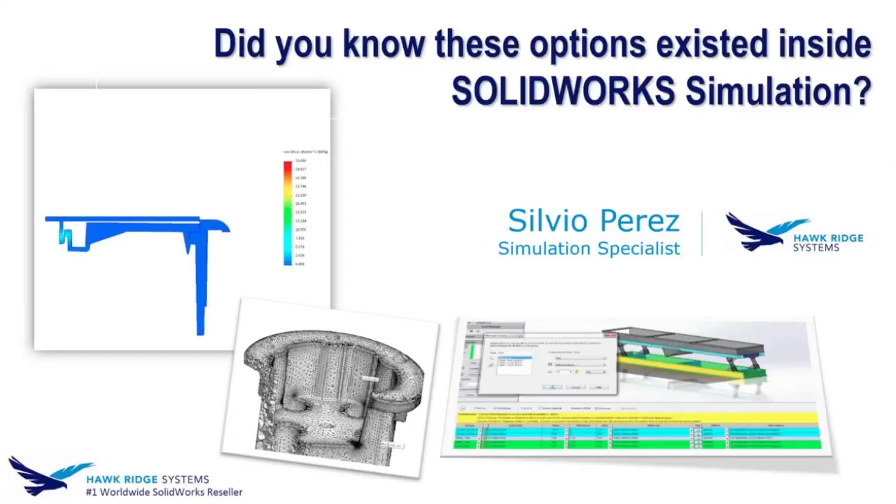But within my training class, there's a lot of things that I try to add in terms of things that may not be included in the traditional manual, tools to allow you to troubleshoot and hopefully make your simulation setup a little bit more efficient. And that's kind of what the goal is today, showing you what's available to you in your software right now, specifically the simulation, to hopefully help you in the process of setting up your problems.

So for today's agenda, it seems like a long list, but they do go by pretty fast. It's somewhat of my top 10 things that a lot of people may not know exist, that are included within at least your simulation standard, the very basic level of simulation, which just includes static analysis for parts and assembly.

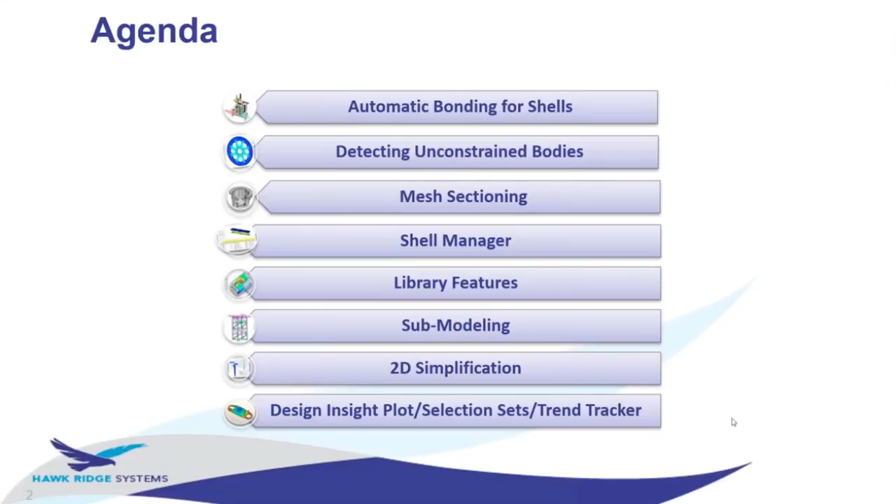So I'm going to kick off the presentation here with automatic bonding for shells. If you work with shell components or shell bodies, a lot of my students have asked me, well, I work a lot with sheet metal, and the benefit of working with sheet metal or even surface modeling is that when you throw that into SOLIDWORKS Simulation, it automatically converts the mesh type into a shell. And that's probably the more recommended type, just because of the thin geometry that we have for that sheet metal.

So that being said, my students or customers who do work with sheet metal usually model in the gap that may be included within the actual model to account for any welding. And that's what we see here in these images on my slide, where we have different scenarios, different orientations, where you actually model in the gap to accommodate the actual weld that may exist in real life.

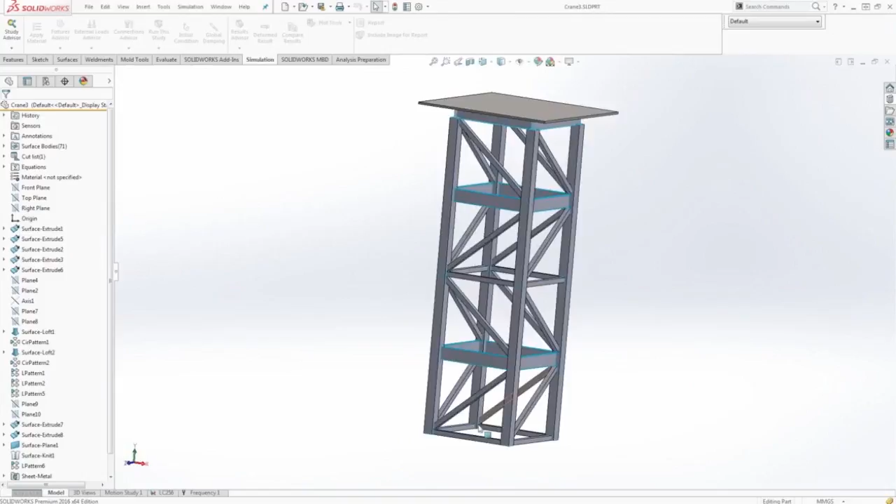So the issue with that is, if I go into SOLIDWORKS here, I'm going to pull up this example of this crane, and the end goal, if we were to manufacture this, is we're going to weld all these beams together, right? And the designer here actually modeled it to accommodate those gaps. I'll just show you here that there is a slight gap in between there. But that presents an issue if we were to try to run a study within simulation.

Why? Because we can define a bonded contact between those gaps, but normally what we recommend is we model it already touching so the global bonded can take effect. And that's what we have here. I already set up the static analysis, and the only set of contacts that we have is this global bonded, right? So what this means is, if I were to run this now,

some of you may already have the experience of seeing what's going to happen, but you see it's running, it's chugging along, you may not know that those gaps exist, and then you get this message saying that the model is unstable. Well, this is expected because we already saw that there are gaps within that body where there are not proper contacts applied, so some of these are kind of floating in space.

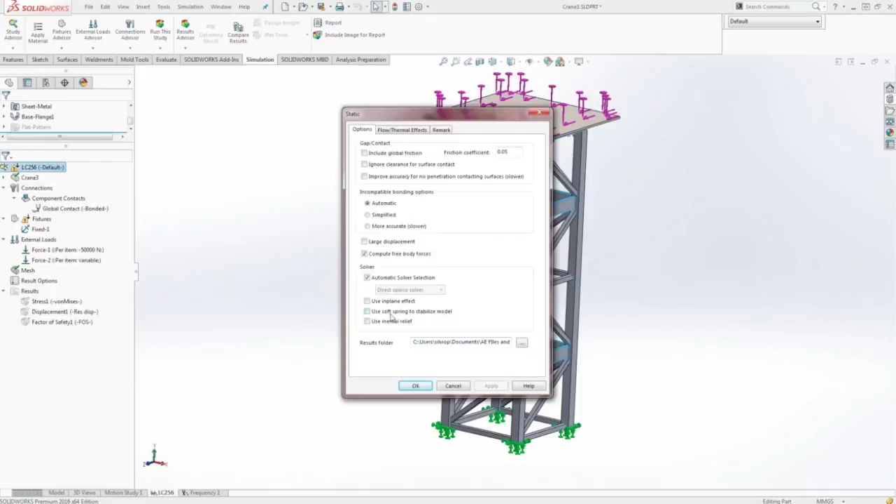So what we would recommend is soft springs, where we can go into the study properties and specify these soft springs to stabilize the model, run it under that condition, and then view our displacement results and see what component is actually flying off. But the downside is that sometimes it doesn't always work. Sometimes you run it under that mode and it still says that the model is unstable, or something is not properly defined. So what do you do?

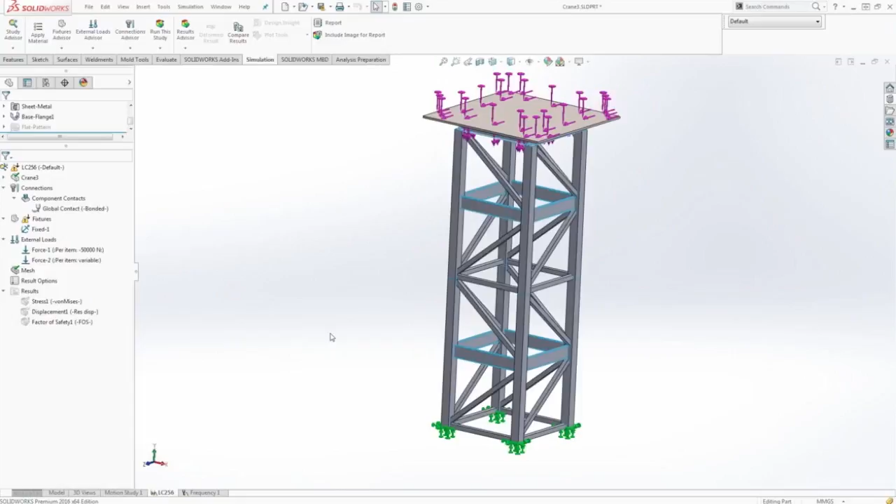Well, you can do a visual inspection, like we did. I already knew this, but it was very difficult for me to see that these actually had a gap. So you can do a visual inspection, but sometimes that doesn't work. So one thing they introduced within Simulation 2013 was this contact visualization plot. If you right-click on your connections, you have that option here. And this is a nice tool because we can run a check for the entire assembly. In this case, it's a multi-body part.

Or we can specify specific members and see what contacts are actually available within that body. I want to run it for the entire part, and you see when it calculates here, it actually generates a list and a color code as far as what contacts are available.

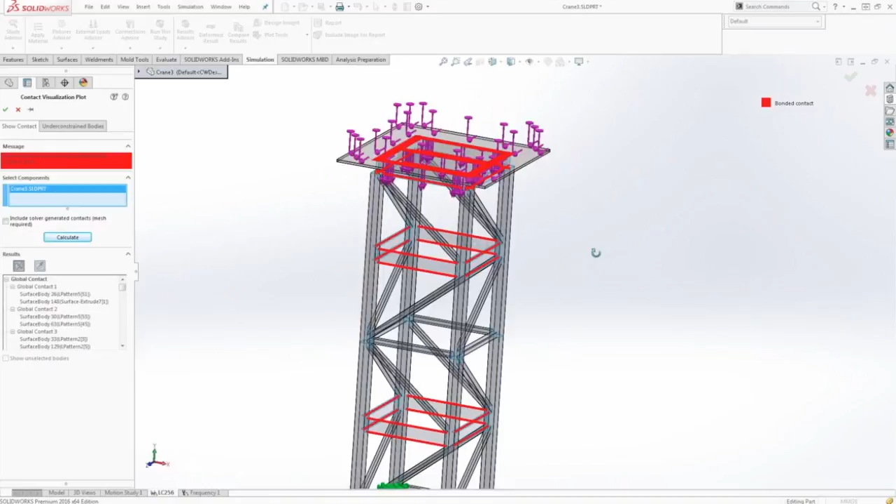So if we were a little bit more familiar with the design, we would actually clearly see that the only bonded contacts that are available are the ones where it's contacting, creating that T-shaped beam. And there's actually no contacts defined where the beam meets these beam fixtures here. So we can already see with this visualization plot that there may be a problem there, which is why I'm getting a model unstable issue.

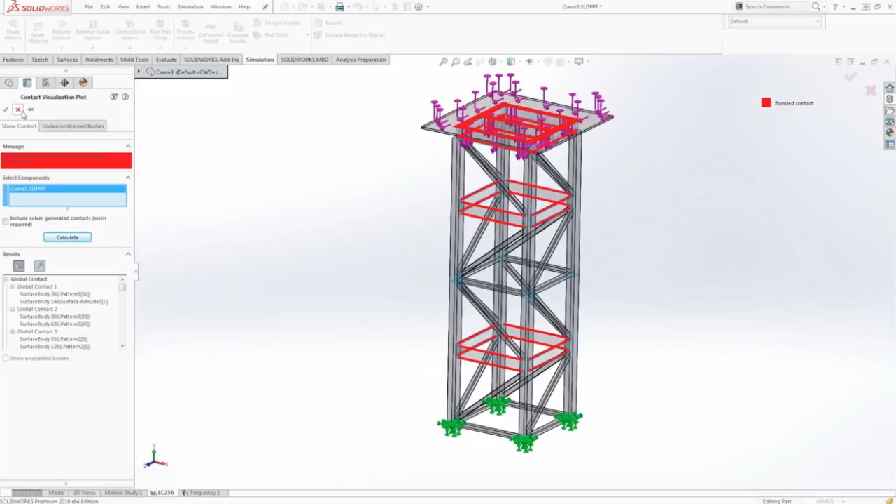Well, so that's more of an aside of what we can do as far as tools. But one of the things that a lot of people may not be aware of, because it's a new feature that was provided to us in 2016. So within that contact visualization plot, we have this unrestrained or unconstrained bodies tab. You can access it on its own as well by right-clicking on connections, and you see that we have that option as well. It takes you to that same menu, except it pre-selects that tab.

And it's very easy to use. All we need to do is just hit calculate, and it runs a check. It's almost running the analysis internally to see what bodies are actually flying off. So after it completes the study, you see that it finished, and it actually generates the list on this unconstrained bodies list. And this is very powerful because it actually tells us what bodies are unconstrained.

So I can select on body 1, and it visually highlights the member in which the contacts have not been properly defined. Pretty much that member there is floating in free space. How do we know that? Because we see what directions they're able to move. There are 3 translation and 3 rotational, meaning that all 6 degrees of freedom are available to move in those specific directions, and it clearly tells me that in that animation after I select that direction.

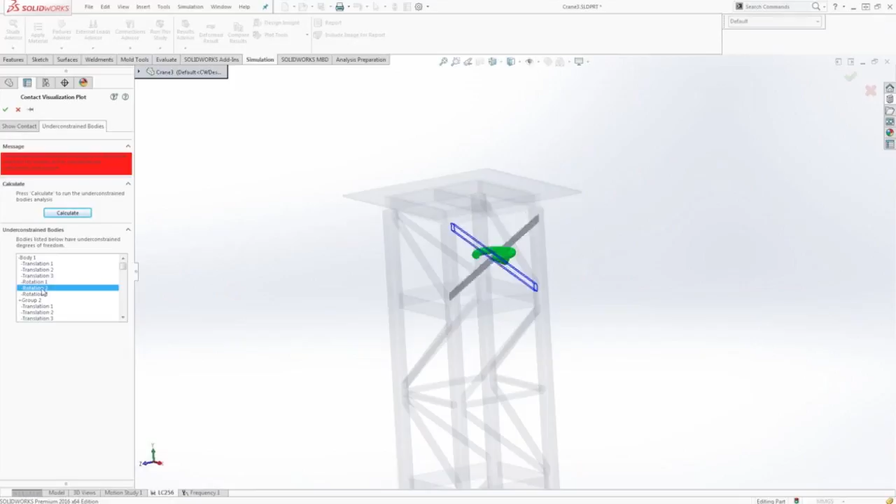So a very powerful tool that speeds up the process of troubleshooting that error message of model unstable or something is not properly constrained. You can run this unconstrained bodies check, and then it'll pinpoint exactly what bodies are not properly constrained. Again, one thing to note is that it's only available to us in 2016. So if you're in an older version, you have to do the traditional way, but it's something to look forward to if you are considering upgrading to 2016 now.

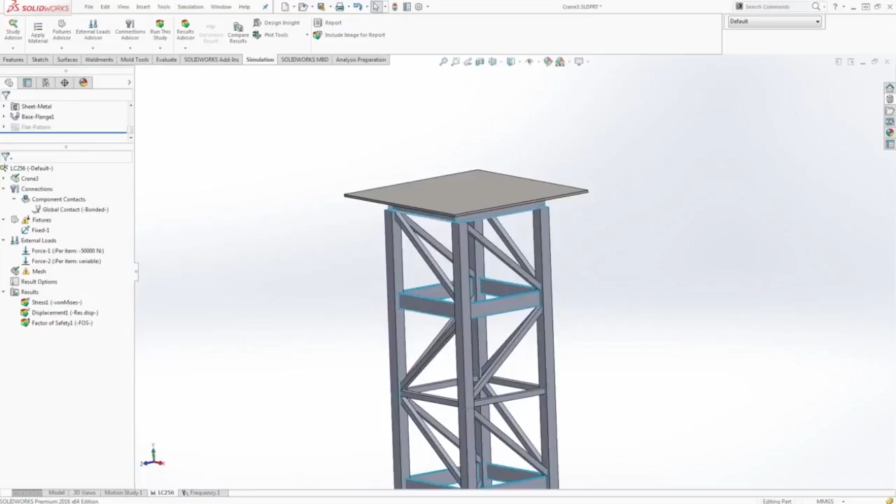So let's go back here. And so, yeah, automatic bonding for shells, a very powerful tool to help you speed up the process of troubleshooting any bodies flying off. So what else we have here? The other thing that we have is, or what I just went over, sorry, is the detecting unconstrained bodies.

And I kind of jumped the gun here a little bit, but what I was getting at here is, how do we accommodate the overall gap size here? What we can do is edit the definition of that global bonded, and I can go into the non-touching face option that's also new to 2016. So when you edit the definition of your global contact which is set to bonded, you can enable that and specify what the minimum gap thickness is as far as that clearance.

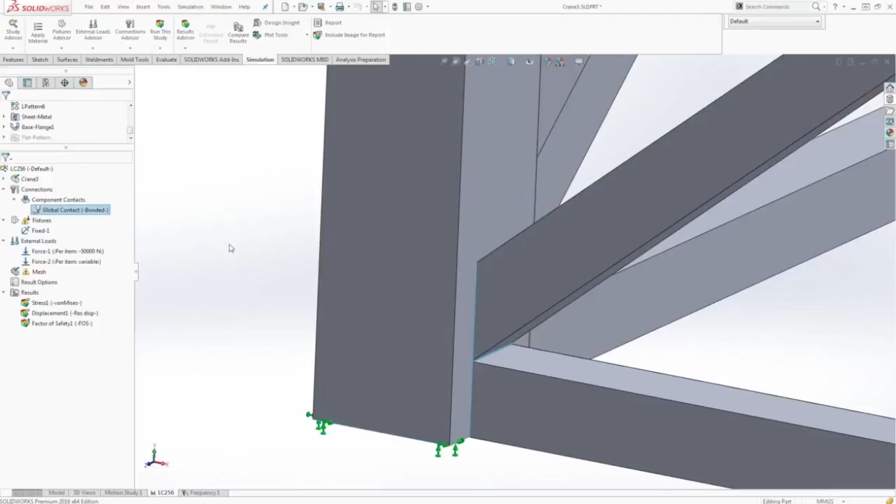So it can say, well, if I am already accommodating for that gap size of 2 millimeters or less, automatically define that as a bonded contact. And all I need to do is enable that option and specify what that limit is. And when I hit OK, you see that I didn't change anything to the model, where before it was giving me unconstrained bodies. I can run this analysis here, and you will see that the study eventually should run to completion.

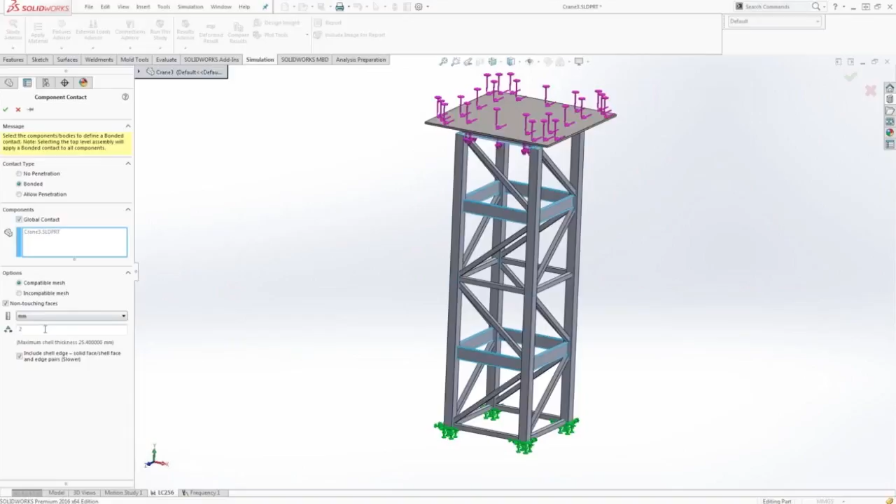So this now accommodates those special cases where you're working in sheet metal or in a beam structure similar to this, and you're modeling in a way to account for the actual gap size for the potential weld that's going to be there in the real life scenario. So a very simple option to enable. Just go into your global contact, set it to bonded, specify your non-touching face gap clearance, and then we can accommodate that without having to individually define those contacts for each bead. So again, saving you a lot of time.

So I apologize for that. I kind of jumped the gun there just because it's a really nice tool here.

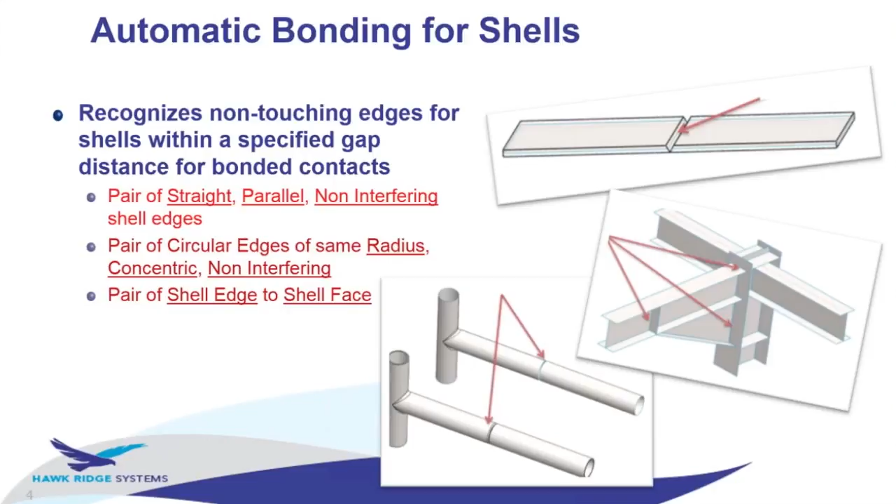As far as automatic bonding for shells, to recap, we can do this for pretty much shell components in these specific orientations. Unconstrained bodies, again to recap, is we can list out the bodies that are unconstrained and animate which bodies, and what direction they're able to move.

The caveat about this, though, is that it is only available for a static study. So if you're running a more elaborate, nonlinear type of scenario and you're still getting some unconstrained body issue, unfortunately we don't have that tool available. So we'll have to do the traditional ways of troubleshooting that issue.

What else do we have here? Mesh sectioning. This is another thing they added within 2016 that can help you really check the quality of your mesh. As it stands now, what we've been able to do is run our analysis like normal and show the mesh overlaid on top of the stress results. But we've always only been able to do that as far as the overall exterior faces of the model.

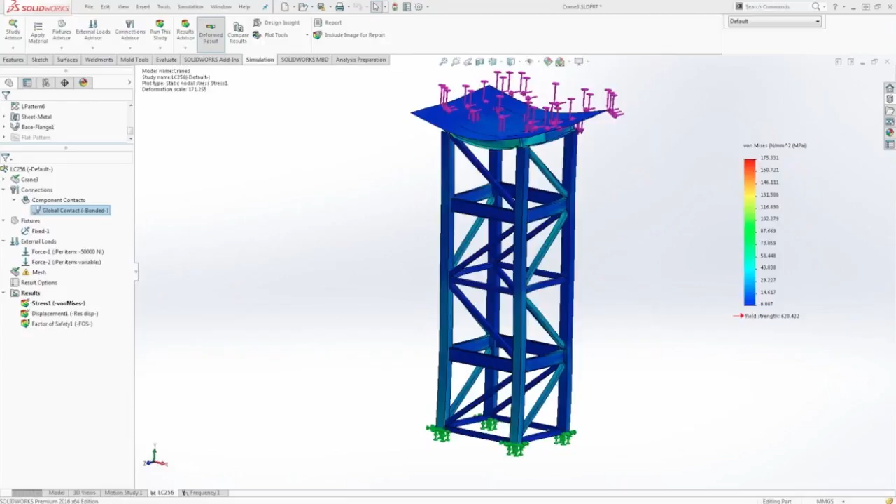So let's take a look at an example here where I have this part and I already predefined the analysis, and I can view my stress results here, and that's fine. We can review them like normal, but eventually once the stress plot actually loads up, based on how I loaded it, I should expect to see some stresses in these fillet areas.

Typically when you're running a structural analysis and you're seeing these hot spots, these stress concentrations in these areas, you want to make sure those stress concentrations are actual true values and not some weird singularity. So what do you do? You end up throwing more elements within that region and see if those stress results converge.

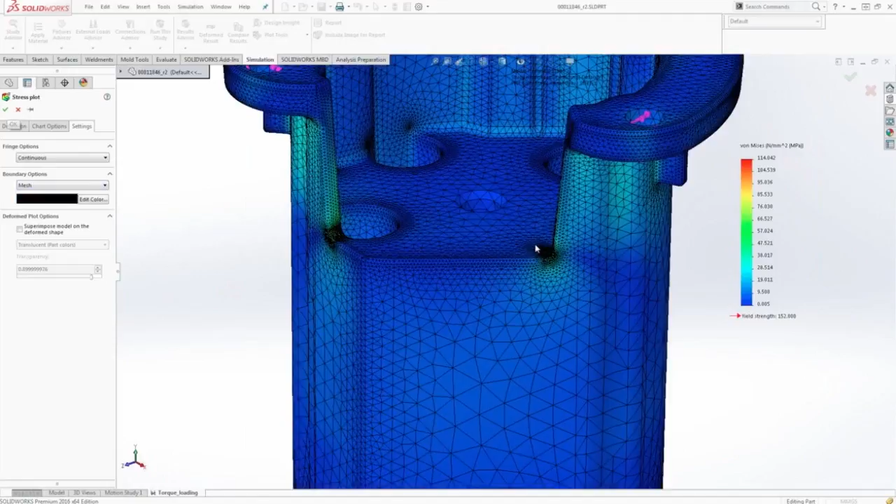Well, you may want to know what the mesh quality is around those specific stress spots. So what you've always been able to do is right-click on your stress plot, go to settings, and under these boundary options, overlay the mesh on that body like so. And you see I had already applied a mesh control within that fillet, which is great, so this tells me I actually refined the mesh in these critical areas, these areas of concern.

But what's happening if I were to do a section view? What's going on, how good is the element quality if I were to do some type of cut section there? Well, we haven't been able to do that until now in 2016.

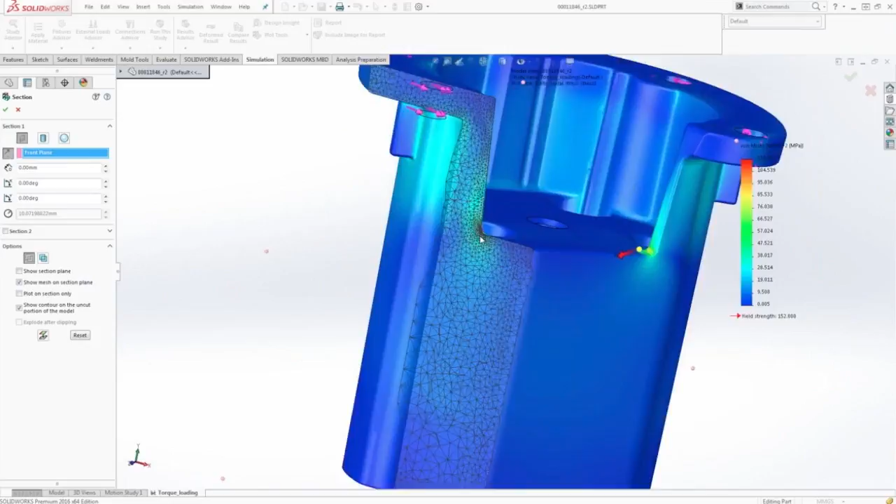So one thing we can do is first specify the section clipping here, and very similar to what you've always been able to do, choose whatever plane you want to cut the model in. I can choose that plane there. But now what we have available to us is show mesh on section plane. So I can select that option, and now I can view what the mesh quality is on that cut section.

This is a very powerful tool, because the whole point of viewing a section clipping view as far as the stress plot is you want to see what the magnitude of that stress is in this particular area. So you want to make sure the overall mesh elements are refined enough where that magnitude is. And you see in this outer section here, we have a pretty good quality mesh due to that mesh control I created. So we now have a better view, a better outlook, and a better understanding of how good this mesh quality is, this mesh control that we applied on this specific region.

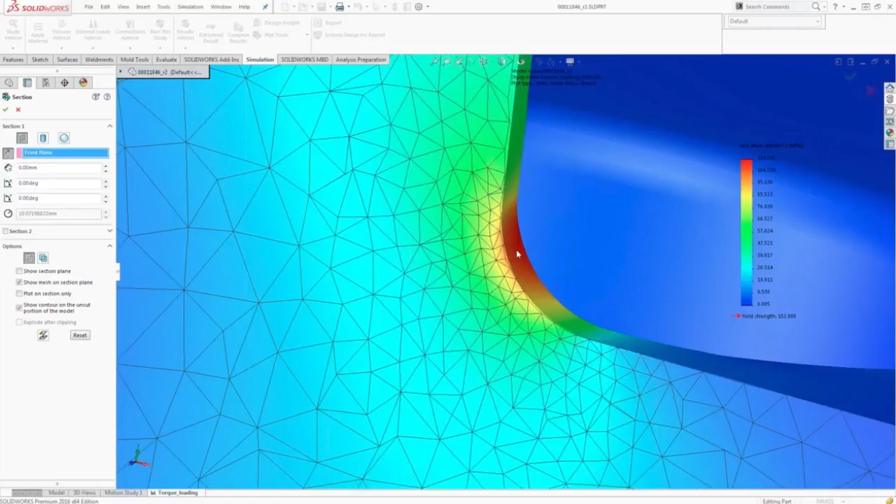The other thing we can do related to mesh sectioning is we've always been able to create a mesh quality plot by right-clicking on mesh, going to create mesh plot, and one of the views we can output is the overall mesh, and that's what's going to show us the overall mesh quality there. You see where I'm getting at here, but let me create a brand new mesh quality plot, just to run through the motions here.

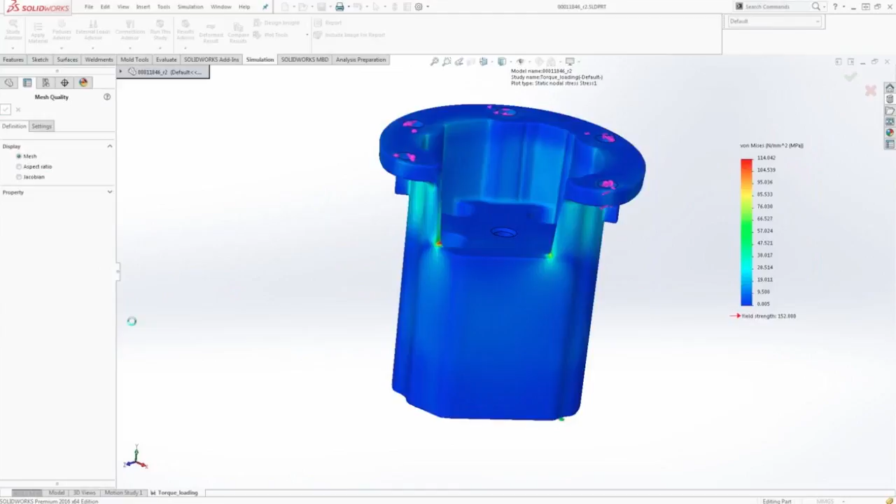Right click on the mesh and create a mesh plot. I can view the mesh there, and it generates that quality plot. What it does for this specific setting I chose is overlay the mesh on the body.

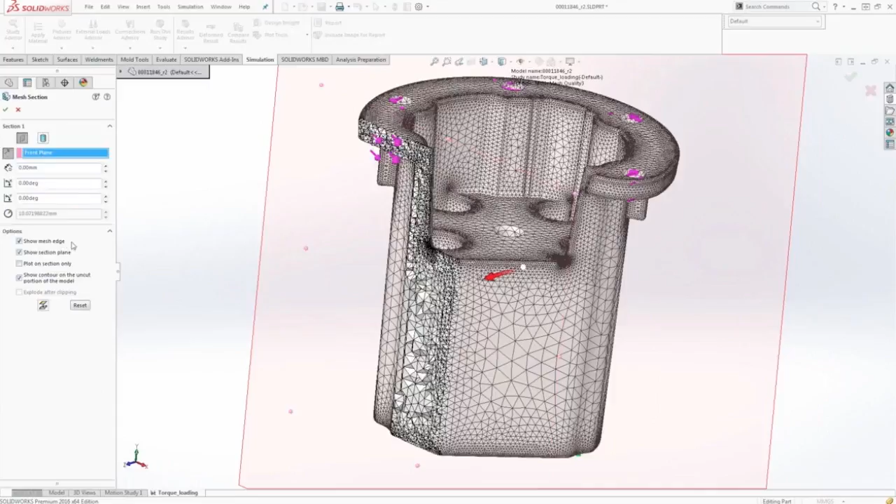But now I can right click and choose the option to do mesh sectioning. Similar to section clipping, I can choose the plane in which I want to cut the body, but now I have the option to enable the actual overall mesh, so we get a 3D view of what the quality of that mesh is, as opposed to just overlaying that cross section.

So we now get a 3D representation of that mesh quality as well, just to show you how good that mesh is in those critical areas of concern. This isn't very apparent, but hopefully you find it useful in specifying and refining the mesh in those critical areas.

One thing to note is that this is only available with 2016 moving forward. So to recap our presentation: we can overlay the mesh on a section clipping, and we can view the 3D mesh elements on that mesh quality plot like we saw in those images.

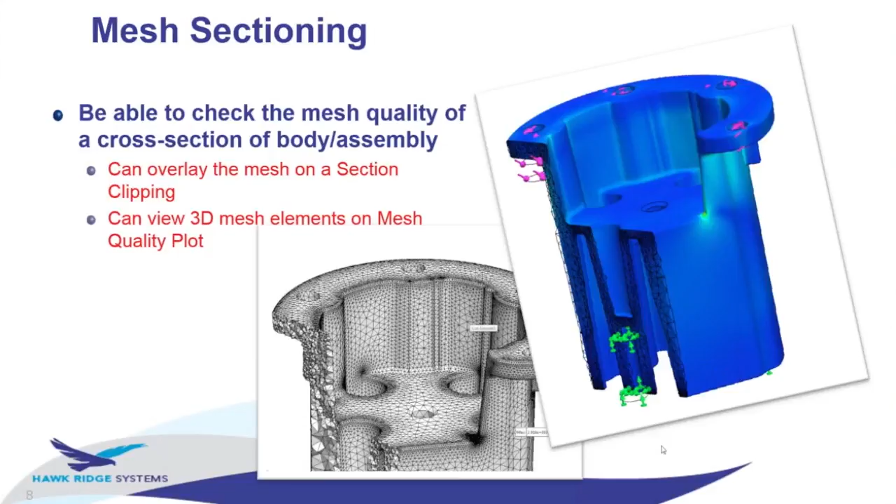Now another useful thing that a lot of people may not be aware of, or if they are, they don't use it much, is Shell Manager, which was presented to us in SOLIDWORKS 2016. It improves the workflow of how we define shells, even more so in a large structure.

One of the tedious processes of defining a shell, if you're converting a solid to a shell with a body or an assembly that has a lot of parts, is you'd have to go individually to each body and specify or convert that solid to a shell element, specify the thickness, change the offsets, and things like that.

But what if you wanted to make a design change and change the thickness of that shell? You'd have to go back to each one and define it again, putting you more at risk of missing a body or accidentally changing something you didn't mean to. Shell Manager helps with that.

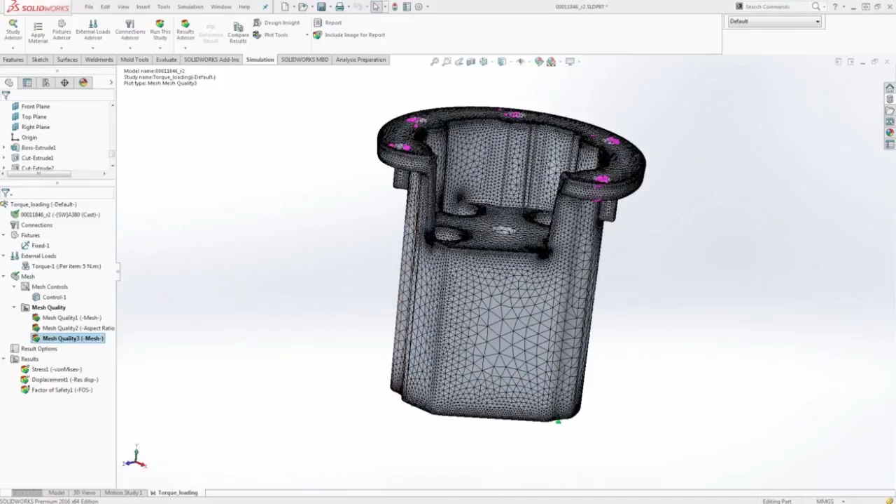You may be working with a lot of shells yourself, where if you model it in sheet metal surfacing, it'll take in that geometry and automatically convert it to a shell. But sometimes you model as normal 3D features, and you need to convert them manually.

To recap what we need to do, all these are shells already, but I needed to convert them. I would need to go to each body and edit the definition of that shell, specifying the faces in which the shell is applied, the thickness, and the overall offset, but doing that on a one-by-one basis.

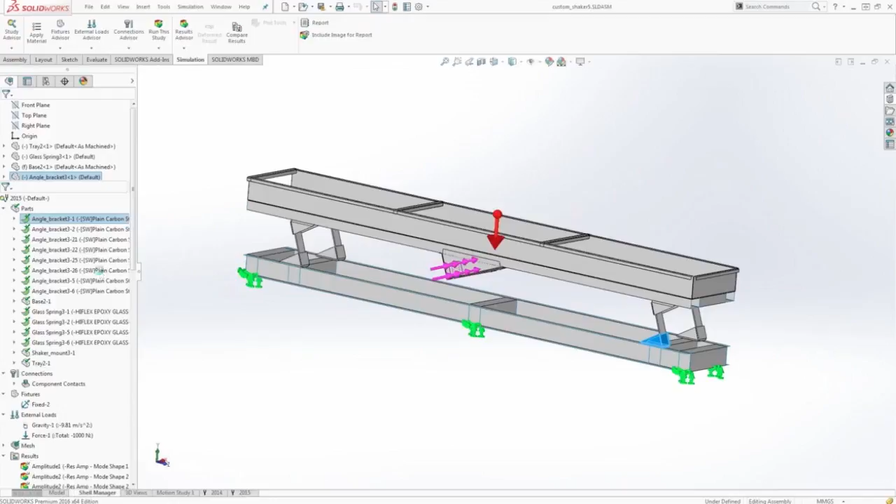So what we have available here is, when we right-click on a component, you may have noticed we have a Shell Manager option. When I open that, we get introduced to this interface.

What's nice about Shell Manager is even though we selected that part as the initial component, we can pin this menu up and create shell definitions on the fly, similar to what you've probably been doing. We have the traditional menu to select faces, define whether we want thin or thick, and define what that face is going to be used as a reference.

Is it going to be the top surface or the mid surface? We can then define the material and the overall shell thickness, generating those shells on the fly within Shell Manager. But the beauty of Shell Manager, in my opinion, doesn't really come in until we define these groupings.

It's optional because we can define those shells on the fly, one by one, like we always have. But I can create a new shell group, and it'll take me to this menu here.

It'll take me to this menu here. You see that what I can do is define my own shell group. I've already created a few of them here where I can call this base rails, and you notice I can define the properties associated to that group. So I can say I want it to be a thin shell.

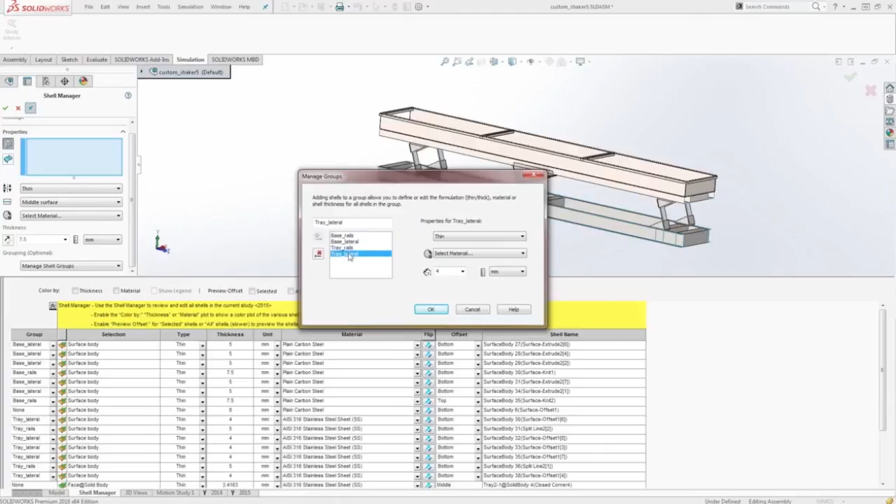I'm not going to specify a material for this for now. I want that overall base rail group to be 7.5 millimeters. The other thing I can do here is add another group, and I can change this to 5 millimeters, and so on. So you see I have different groups to accommodate the different thicknesses of my overall geometry.

So let me go ahead and cancel this. The beauty of this is that when you go into the shell manager, it lists out all the bodies that you may want to convert to a shell, or that you've already converted, and pretty much the properties you want to change. In this case, I already did that work, I already converted the solids to a shell. But now, because it's such a large structure, what if I wanted to change a parameter, like the overall thickness, or define an actual material for that?

Well, you see all those bodies are listed within the shell manager, and they're associated to a specific group. So I specify that this specific shell body that highlights in the graphics area, I want to link that to the base lateral. And then I did that for all the other ones as well.

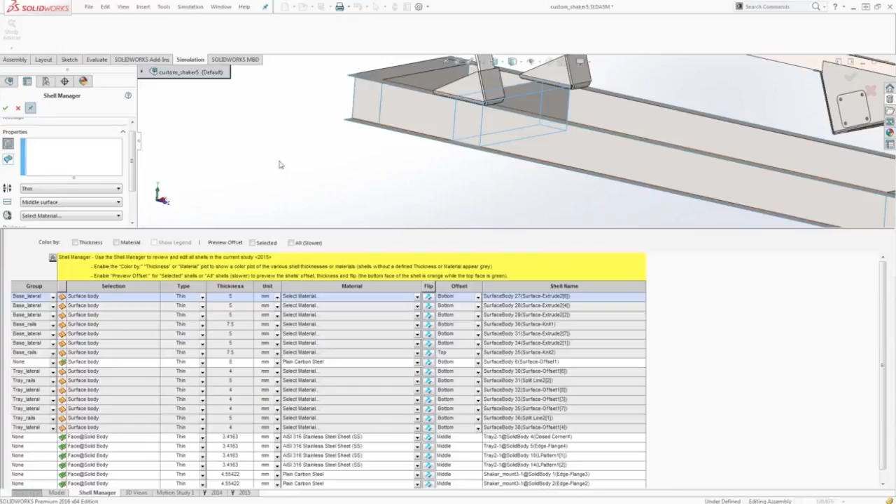So the beauty of this is that, what if I made a mistake, or I just want to do a design change, and I really wanted to make all those base lateral components 6 millimeters? What I can do in the actual table is override that from 5 millimeters to 6 millimeters, but notice it didn't change it for that individual one. It's linked to that specific group, so all the other ones that have that base lateral grouping change that thickness as well. So now I no longer have to go to those individual bodies and edit the definition and change it to 6 millimeters.

I can do it just once, and it propagates to all the other components associated to that same group. I can do that as well by specifying a material. What if for that group lateral I want to specify alloy steel or whatever it is? I can hit apply on that. You see, I don't have to do it for each individual one, it applies it for all the ones that are base lateral.

So it's a convenient way for you to edit or add any property to any shell you want to define on the fly. We can even turn on these filters here in terms of the overall thickness. This is really nice too, because in this case we do have a lot of shells or surface bodies, and you want to make sure all the faces are consistent to a specific grouping.

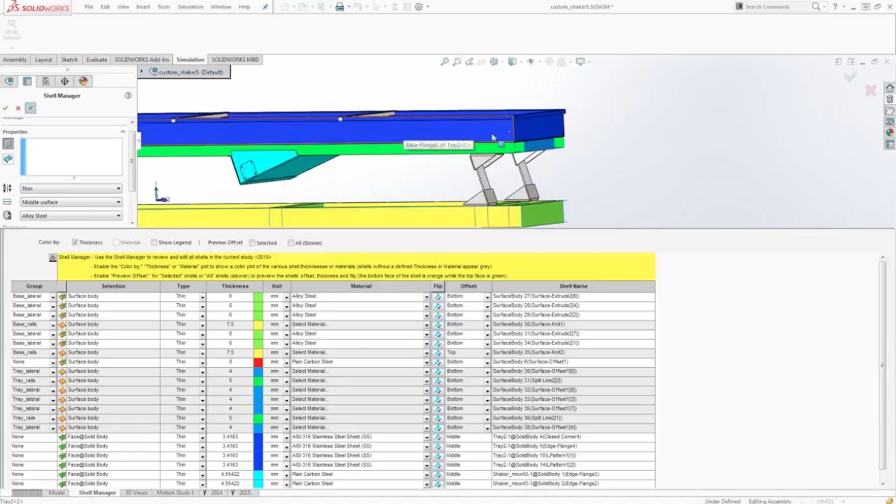So let's say for that blue face, for whatever reason this face was a green face or didn't have a color, well, now I know I either missed that face to define it as a shell, or I accidentally defined it as another grouping. I can easily go into that group, it highlights it in my table, and I can link it to an actual grouping and change that on the fly.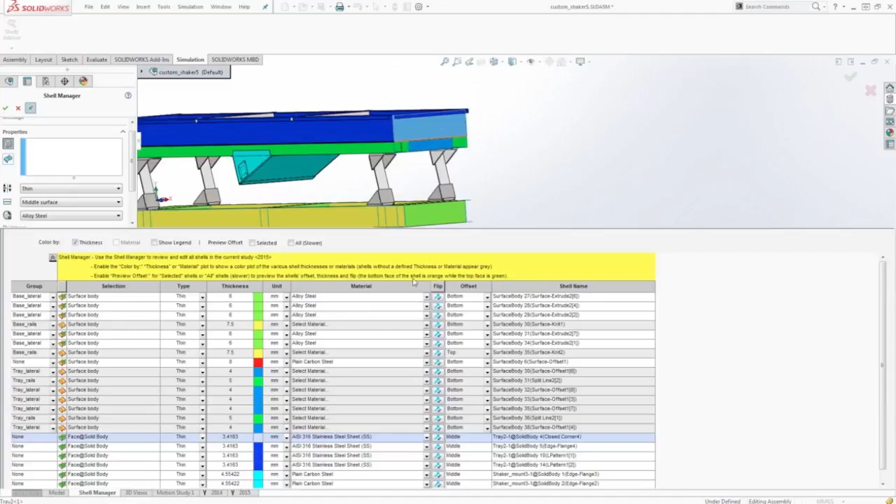So it really becomes useful when we have a large assembly or a large structure that has a lot of shells. We can utilize the shell manager to change different inputs at once, pretty much just change one property where it propagates to the other bodies very fast and efficiently. So hopefully you find that useful, and hopefully it's something that if you didn't know, you can utilize now and play around with it a little bit more.

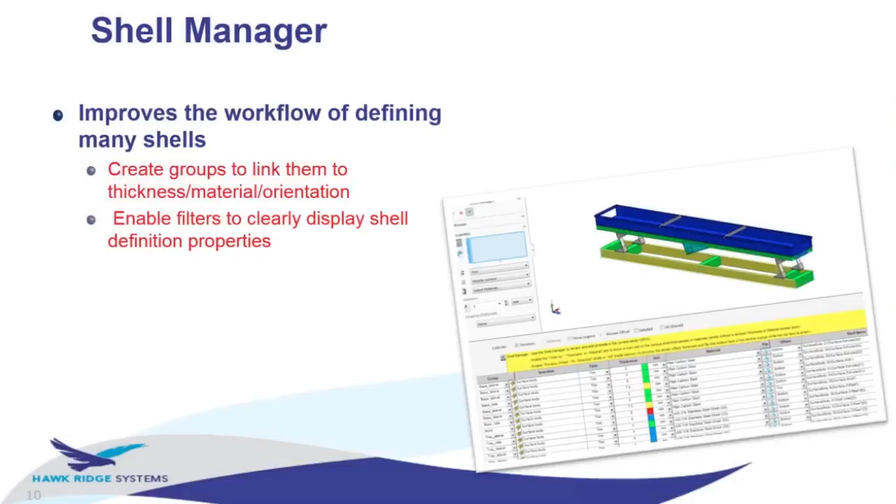So that's the shell manager. The next thing I want to show you that a lot of people may not know exists is library features. You may utilize library features in your normal modeling, where it adds a convenience factor of a certain functionality, a certain workflow that you constantly use to design your part.

Why do that for each part one by one? Why not save that workflow and then apply it for your future components? Well, it works the same way inside simulation. For any fixture or load you define with their proper inputs—a numeric value for your load, a certain direction for your fixtures—you can save that and apply it for future components. Let me open up another example here.

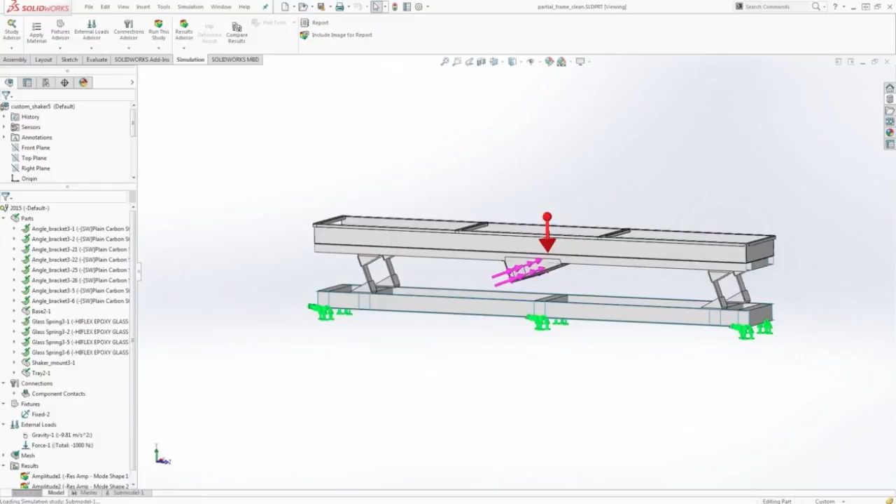Let's say I wanted to define fixtures and loads, and I pretty much did that already. So in this case I defined several different loads. For this specific load, if I edit the definition, I wanted to apply a 250 Newton load, and the same thing for that 500 load as well. And you see I have a specific fixture, in this case a fixed geometry.

For this example it may not seem too useful, but it becomes a lot more useful when you have a larger scale problem. So what you can do, for example, is for that specific load, I can right-click on it and say Add to Library. And then it brings up this library here, and what you're looking at, this design library, is associated with your actual design library interface on the right-hand side.

You may have never noticed, but you've always had an analysis library here, pre-programmed within a fresh install, with some example files of static analysis—there's already some load fixtures you can apply to your bodies. But if I were to save a unique force, let's say, again right-click on that force and say Add to Library, I want to save this under my overall analysis library parent folder, and I can hit OK.

And when I go to my design library here, you see that I have that overall force. I've done it a couple times, but this one's called Force 3—that's the one I just generated.

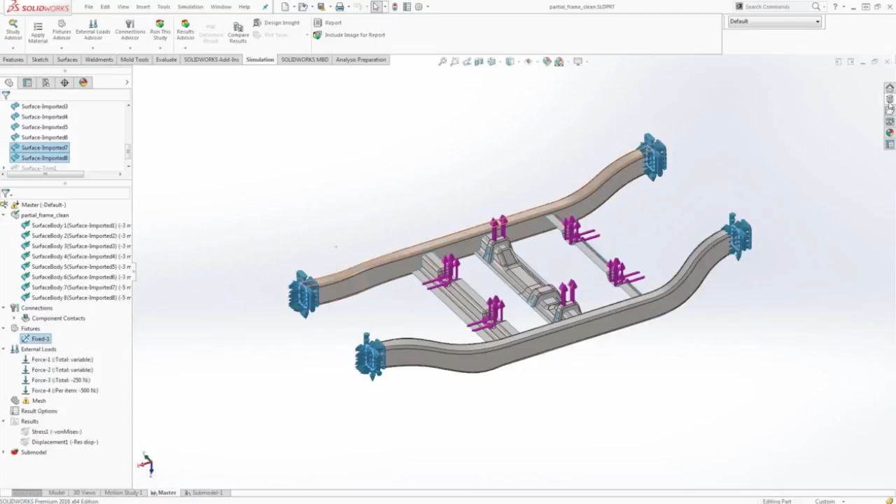I created the same workflow here when I created the fixture—I right-clicked, said Add to Library, and saved it under the design library. I can throw that into the graphics area, and you see I even saved all the edges of that fixture. So I can create all those fixtures with just a quick drag and drop and then redefine them automatically.

Nice little convenience factor that's always existed, very similar to our design process as well. So going back to the overall presentation, all you have to do to add to a library is right-click on that sim feature and save it in whatever folder structure you want. Then we can apply that for future models—that's what you're looking at in the images, being able to throw it into the graphics area and make the proper selections within the actual unique model.

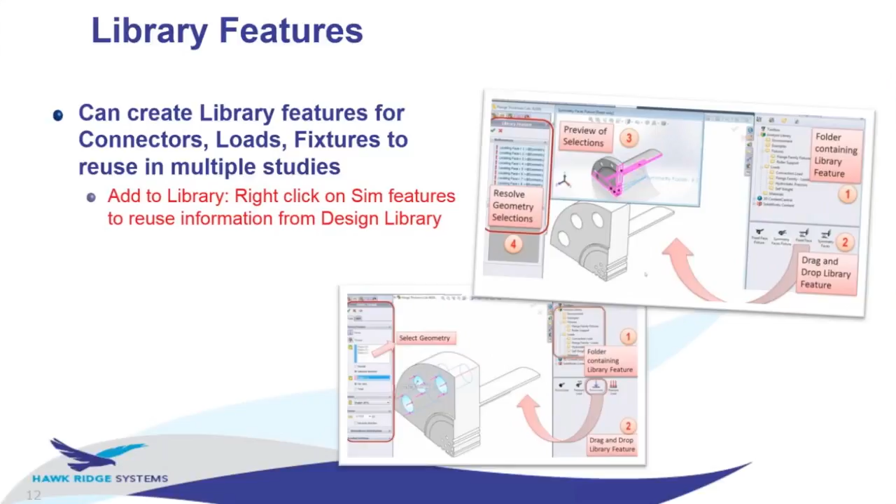So I just got a question here—good question. Can I save certain plots within the model? I want to say I can take a look at this right now, but those are going to be unique to the actual interface, so it's just embedded in the normal result file. You see here when I right-click, there really is no option to save it into the library. So unfortunately, when it comes to those results, because they're unique to that specific body, we can't use that. Hopefully that answers your question—if not, feel free to send a follow-up question as well.

But this leads me into my other "did you know this existed" topic, which is submodeling. It's something that they introduced in 2016 as far as its capability, but it's a nice way for you to break down the overall global assembly that you may have run and focus on a unique component and run further refinement on that body.

So what I mean by that, it really becomes beneficial when it's a large assembly. And that's what we're going to run here. We have this frame, and I define the proper fixtures, define the loading condition, but I see that I get a lot more stress on this specific component here. So now my attention is focused on that component where I want to refine the mesh, get more accurate results by refining the mesh on that individual member.

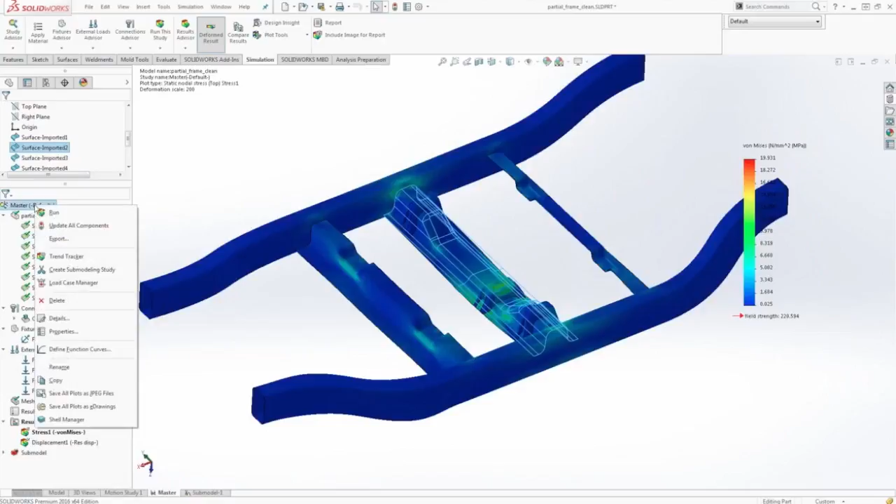So how does it work? You see that I ran my overall top level, my master simulation study, if you want to call it that. I defined my fixtures on the ends, I defined my loads, but now I want to focus my attention more on this member. I mean I want to add a mesh refinement on that member, but I don't want to necessarily run the entire assembly there. So I can right-click on the overall study, and I can choose this option here to create submodeling study.

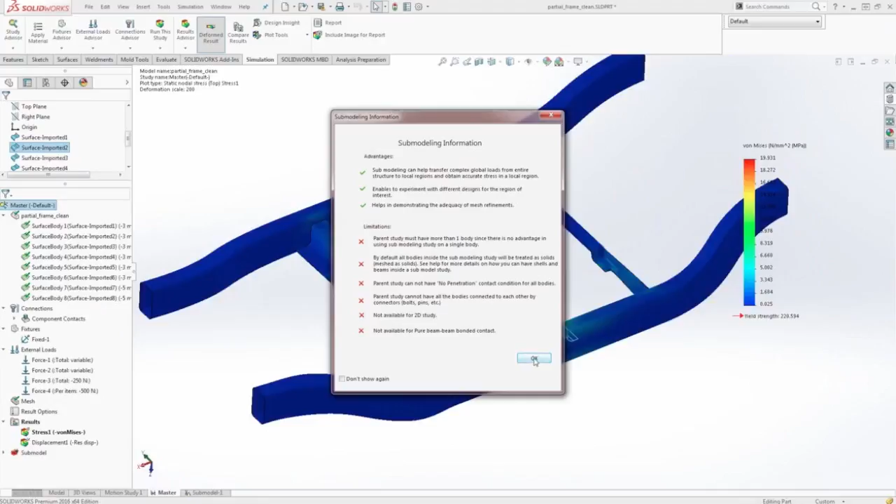When I select that option, it gives me this message here as far as what advantages submodeling has and what are some of the limitations. There are some limitations to this, because we are isolating that component. One of the things that really stands out to me is that the parent study, the master study, can't have any no penetration contact defined while we take that into a submodel. So right now, we assume that everything was bonded in order for this to work. It doesn't apply for every condition, but the point of submodeling is once we hit OK, we can then choose what member we want to isolate.

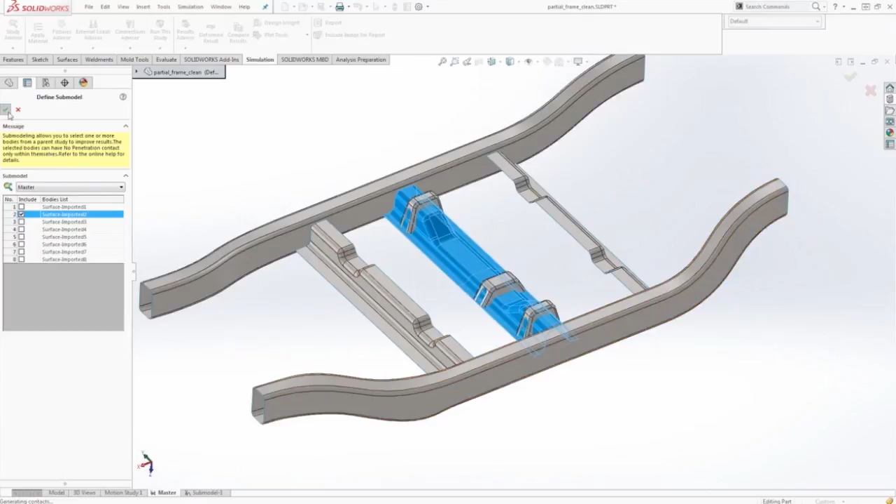In this case, I can choose this member here, and all I need to do is hit the check mark on that box. If things were connected, I could even select these two components as well and isolate those, not just on an individual basis. So I select that component, and when I hit OK, it brings that individual body into a unique study. Let it process here for a sec. What's nice about this is that it creates its own derived configuration as well. So you have your top level configuration, and we have the default submodel for this specific component.

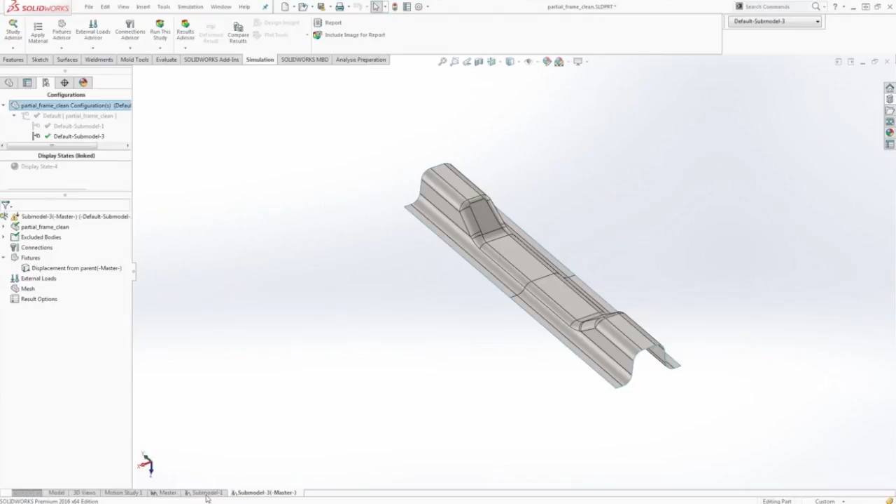We have that individual component. Under fixtures, we have this displacement from parent master. So we don't have to define any more fixtures because it's already taking in that data from the original master. It should have brought over the loads as well. If I go over to my submodel here and activate that configuration, you see that we specified what loads we wanted to transfer over. But the main point is now being able to add a mesh control, add further refinement on that individual component. And when I run this, it's going to run the analysis for that individual component. It may need to update if you made a change in the master model, so it'll run both.

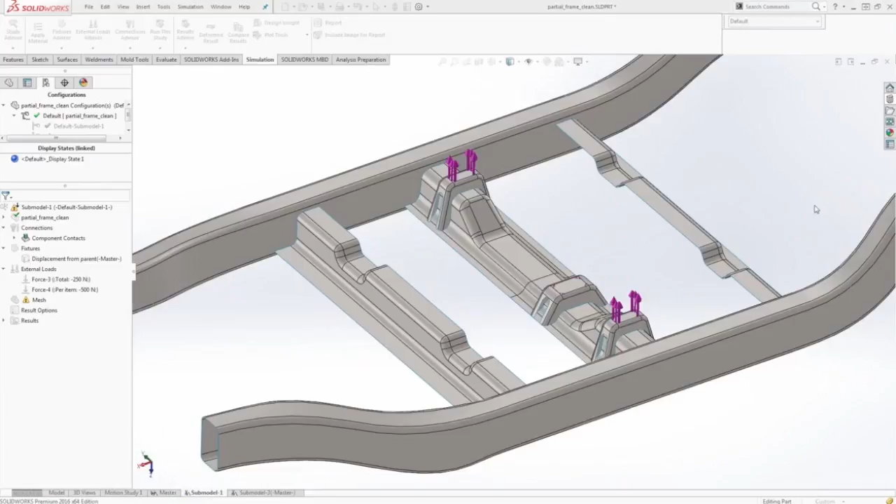So you see it runs the master, and then it'll switch over to the submodel, and then it runs it as well. So you see that we still get the loading bar there. And I didn't add a mesh control in this case, but that's what we could do within the submodel. We didn't need to define any fixtures. We were able to bring over the loads as well, and we can add a further mesh control, and it takes into account as if it was still attached to the frame.

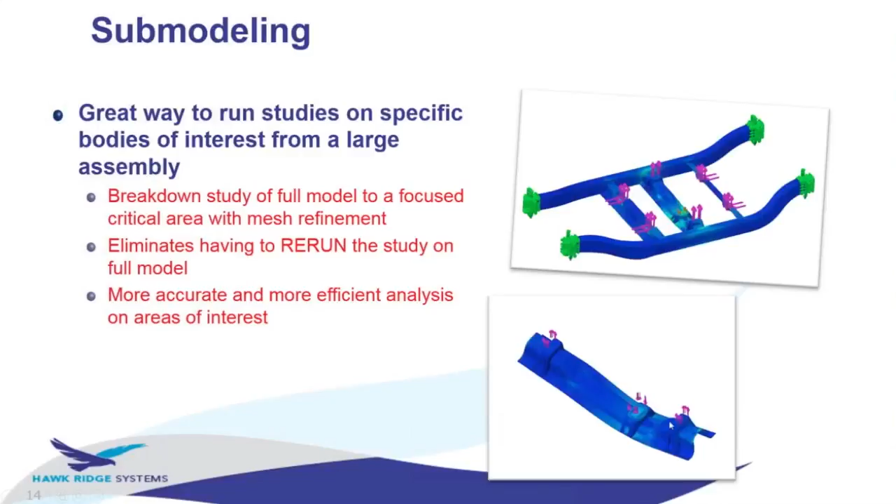So we can focus our attention more on this individual body and getting a more accurate stress result due to the mesh refinement, and not having to run and mesh on the global scale or on the master model. So again, being more efficient, saving more time on the overall simulation study. So hopefully something there that you can utilize moving forward. So again, more accurate, more efficient analysis on areas of interest.

Similar to simplifying or saving time, especially computing time on an analysis, I'm sure we've all gone through it, where we generate this complex geometry. It doesn't apply for every condition, there's certain things you need to consider. But one example I like to use is, what if you modeled something that's symmetric about a cutting plane, and your loads and your fixtures are symmetric about that cutting plane as well? Why not cut the runtime in half by physically cutting the model in half and specifying that you have a symmetry condition within simulation, right?

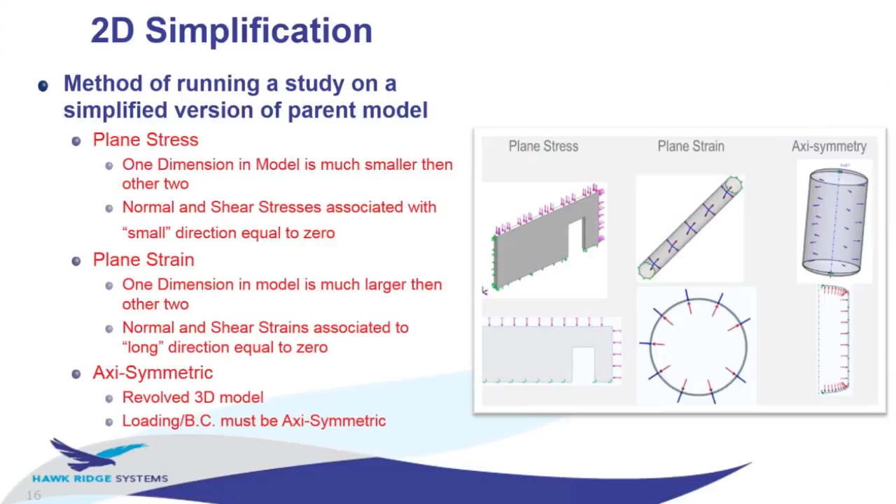And if you work with revolved geometries where, again, the pressure is symmetric or axisymmetric across an entire face, we can almost revolve those boundary conditions and assume that everything's going to be uniform across that revolve, and then simplify it by taking a slice of that model and running the analysis in a very quick fashion. So here are some examples before I actually show you the interface. This is a plane stress example where we can take a slice of that model where we're assuming in the depth of that geometry you're not going to see a lot of stress activity. So we can still get stress results off that 2D simplified case.

In a plane strain scenario, usually intended for long, slender geometries where the stress is going to be uniform across that entire length, we can take a slice of that model and simplify that process where we're not applying the loads onto the faces, we're now applying the loads onto those edges. Same thing with axisymmetric, where I want to clip something into that overall revolve feature, and I want to focus my attention in that area. I don't necessarily have to model or run the analysis on the entire 3D geometry. We can just take a slice of that, look normal to that, and see what those stresses are.

So what does that interface look like, and how does it work? That's the overall gist of what we need to consider for 2D simplification. Oops, sorry about that. Let me go into my SOLIDWORKS here real quick.

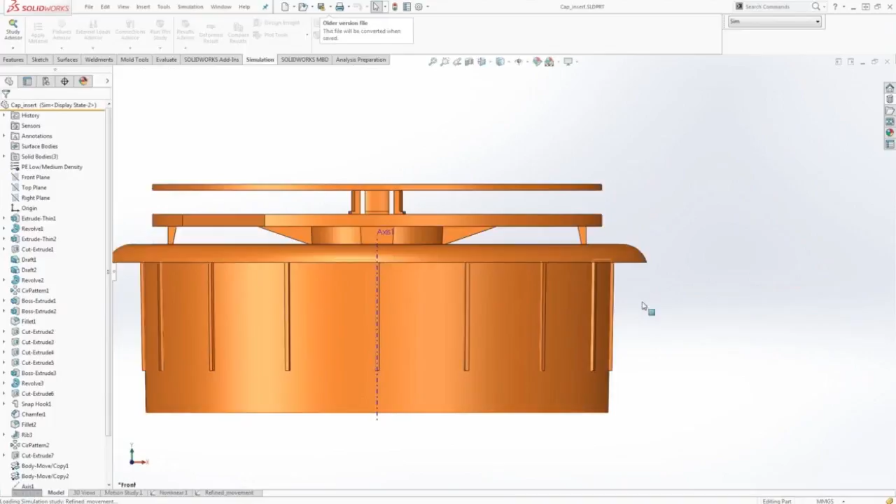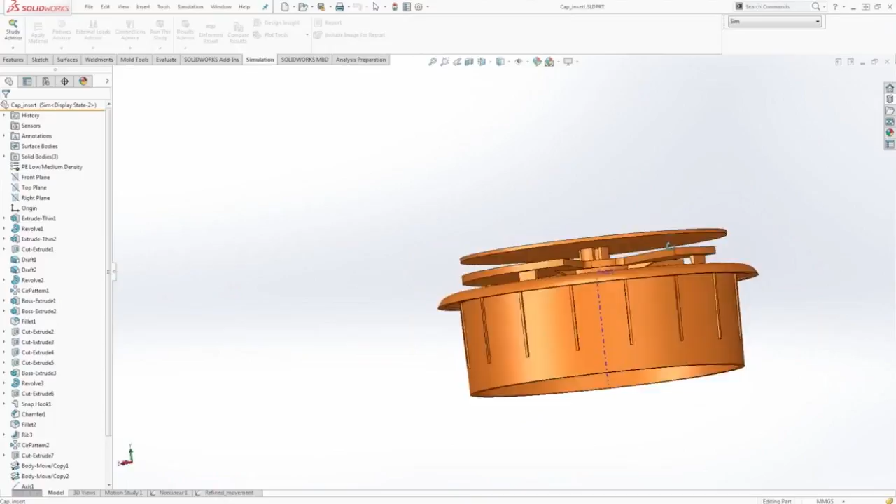And let me show you a 2D simplified example here. So I'm going to start off with the 3D model, and all I want to do, and this is a nonlinear analysis, but all I want to do is see what the stresses are of those actual clips snapping into that lid. So I'm going to add some compressive force to actually snap it into that component. But you notice that we have a revolved shape where it doesn't really matter, because it is axisymmetric. Do I really need to run the entire 3D model?

That's a pretty complex model in a nonlinear sense, because there's a lot of contacts that are changing as the load's being applied. So what we can do is I can generate a new study, and that 2D simplification is available to us under a static analysis, thermal, and even a nonlinear. And you notice that for those study types, I have this use 2D simplification option.

And when I enable that option and then hit OK, you see that I can choose what study type I want to run. And it's associated to whether you have a plane stress, a plane strain, or an axisymmetric. And what's nice about that is we have an animation that's associated to that. So you see in that wrench, the overall thickness of that, we don't really care about that. We wouldn't expect to see too much stress in that direction, only in the plane direction, so we can take a slice of that model and apply our geometry.

Same thing with the plane strain, usually more for long components. Anywhere where we slice the model, those stress results are going to be uniform across that. And then we have axisymmetric, where we just choose what that cutting plane is, choose the axis of rotation, and you see the results we get, and we can kind of revolve that in that fashion. So really nice animations to kind of show you that. In this case here, I already have it defined, and you see that we get something like this, where just imagine these two components being revolved around that axis, we would get that overall 3D geometry.

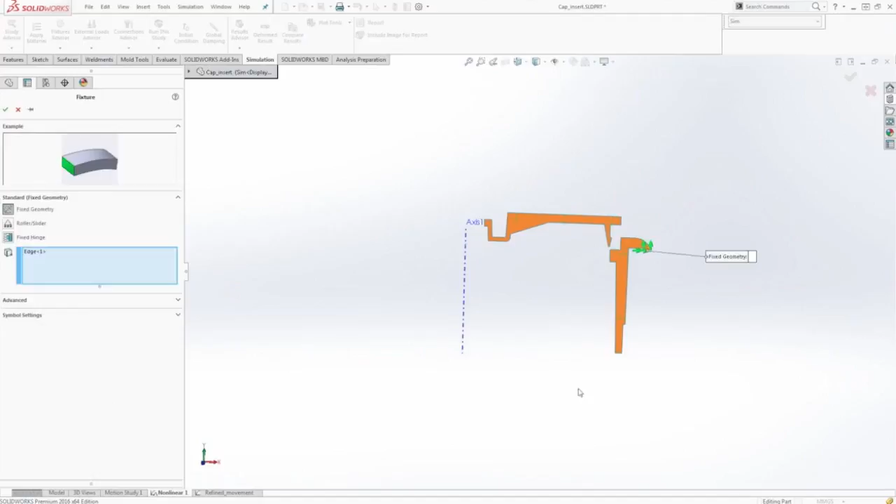The way we set up the problem is very similar, if not easier, than what we would have to do in a 3D sense. We still need to define the material properties. We still need to define the fixture. In this case, if I edit one of those fixtures, instead of me having to select an actual surface face, I'm just selecting the overall edge. And that's representing that if this was revolved, that entire face is being selected.

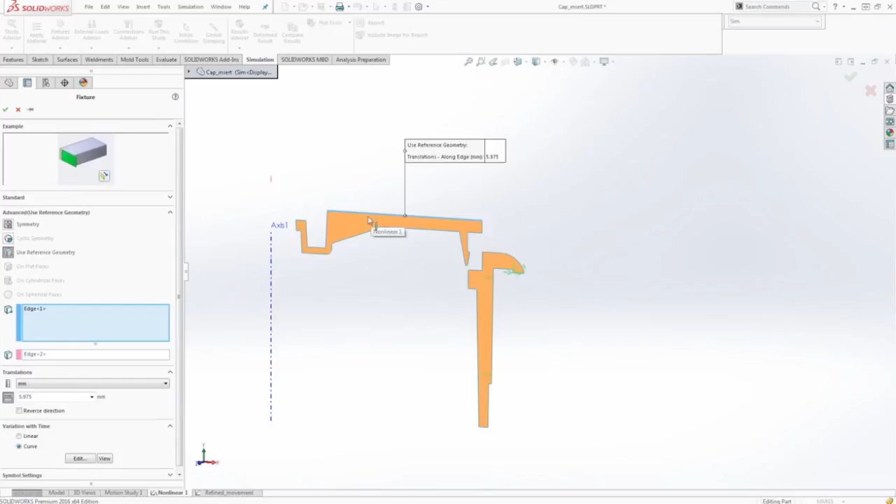And the same thing applies for my load conditions here, where we actually didn't apply a load condition, but the same thing would be the case as far as me selecting the overall edges. In this case, I applied a prescribed displacement, where normally in the 3D model I would select that face. Now I'm selecting the overall edge. So the process almost becomes a little bit simpler, and the processing time, the computing time, becomes a lot faster as well.

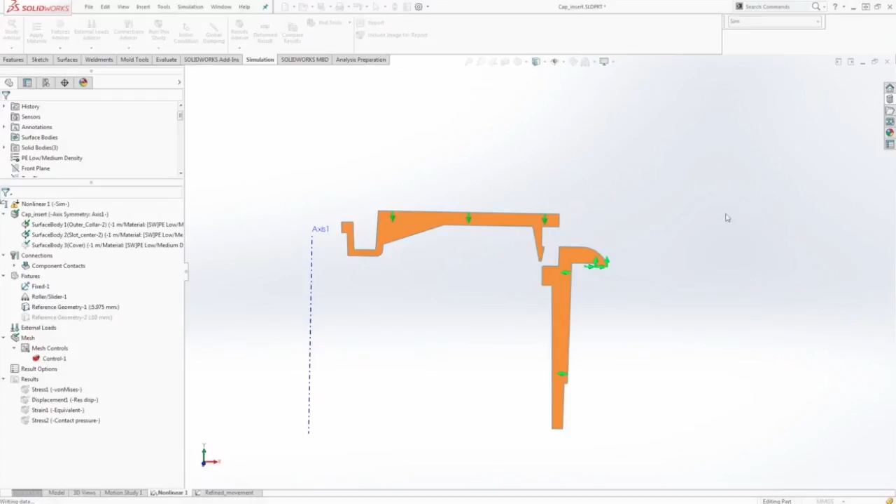We even have the option to define a mesh control on fillet edges or faces and things like that, where I can say, well, my area of concern is along this fillet. Again, I can select that edge as well. So once I define my study like you normally would, you can run the analysis, and for this nonlinear case at least, we can see it kind of snap in and get an overall understanding of where those stresses are, so we can eliminate having to define all the contacts for all those 3D faces. We can simplify it with this 2D simplified analysis.

So you see, we still get the results that we want. We're getting the stresses, and we're able to see the stresses in the areas that we would care about. And when I snap that in, once it completes, we can review the results like normal. In this nonlinear case, we can still view what the stresses and displacements are, factor of safety, except we don't initially have the 3D geometry.

I always make this joke, well, what if you needed to create a report, present it to your boss? Your boss is going to look at this and say, well, that's not the actual physical geometry.

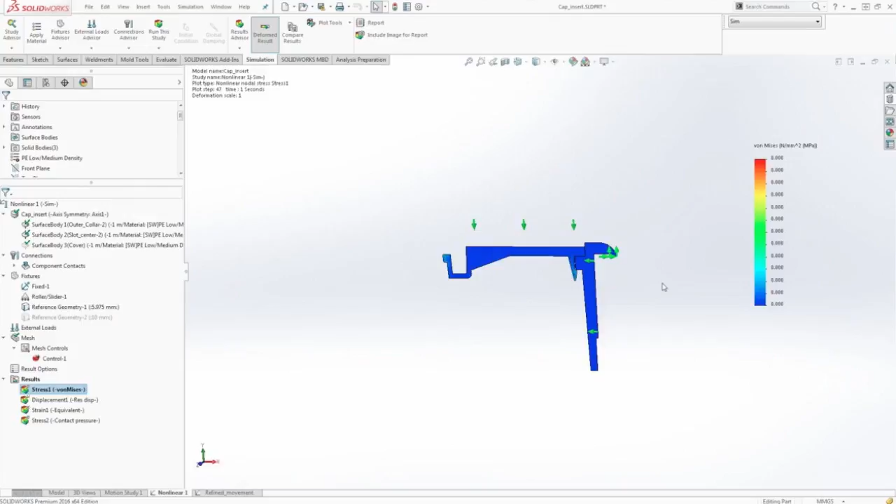Well, luckily for us, simulation thought of that as well, where we can edit the definition of that stress plot and view it as a 3D model. And you see, all it does is it revolves the actual 2D simplified component. So we get a better representation of how it's actually going to look in real life. You see that it cuts off the section there automatically.

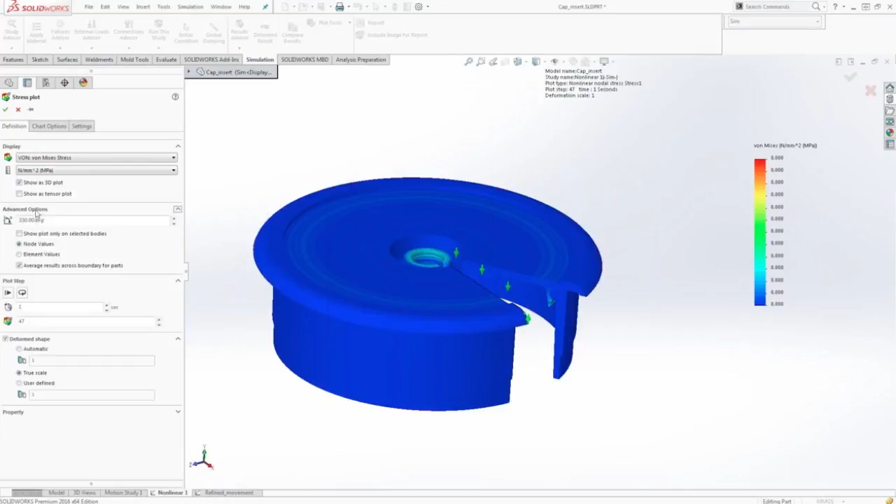We can close that off if we edit the definition there, just to show you what that cross section is. But we can go to the advanced options and say 360, right, and it'll close it off. But again, a very complex problem drastically simplified with that 2D simplification process, right? So very powerful tool here, right?

And hopefully something that you can utilize within your future studies. Again, it doesn't apply for all of them, but hopefully you have the general idea of when you can apply these to make your life a little bit easier. Okay. Well, running towards the end here, I just want to show you quickly some of these other options that are available to us to help in our overall setup process and our design process as well. And I'm going to start off here with the Design Insight Plot.

I haven't seen a lot of people utilize this, but it's a way to show the areas of the model where it will see a lot of the load, therefore potentially excluding areas where it won't see the load, and then you can make the decision of, well, if it's not going to see a lot of the load that I've applied in those specific regions, I can essentially remove some of that material, saving on material cost, right?

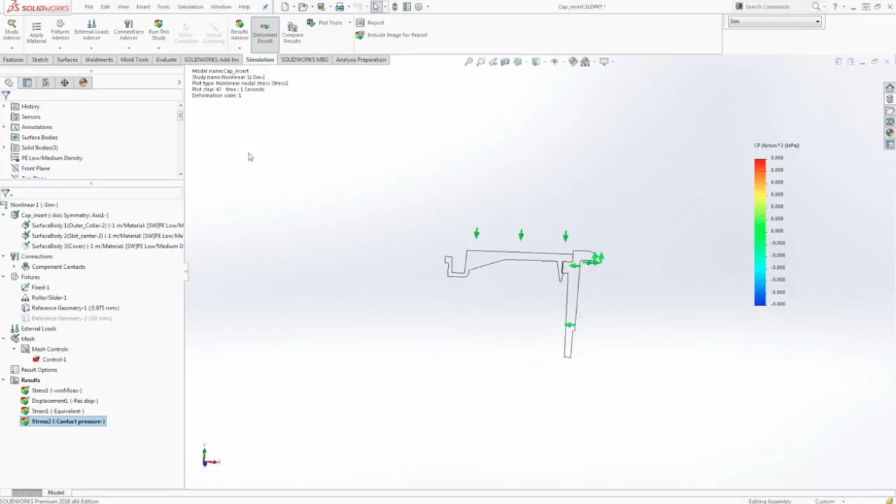So if I right-click on my results, I can create this Design Insight Plot, and you can read the message here, and it says, adjust the slider to plot a continuous path between the loads and the restraints. The translucent portions of the Design Insight Plot carry the applied load less effectively than the solid portion.

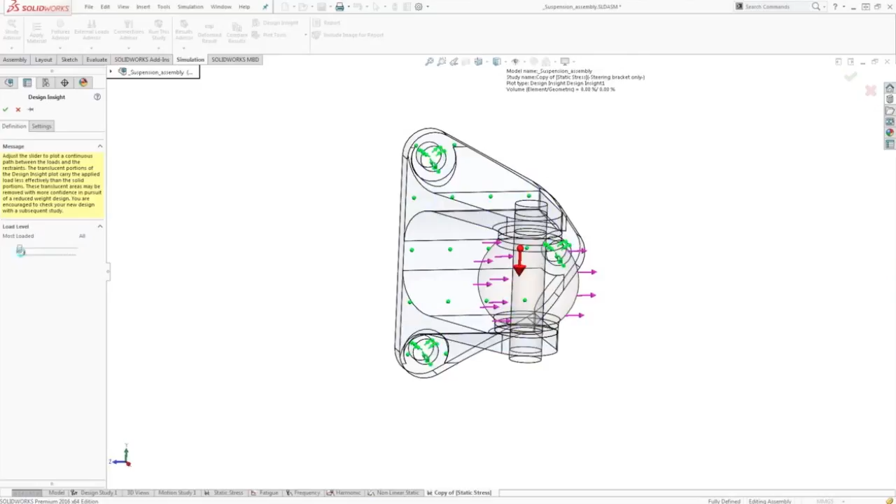So pretty much what I can do is I can specify, at one extreme, where the loads are not really playing a factor. But if I gradually increase where this particular assembly is going to see those loads, the areas in blue are the areas where it's seeing those load conditions. The areas where you can see through them are the areas where it won't see most of those load conditions based on our setup.

So what you always want to do is set it to an all or close to all condition, and you can see, well, in this area here, I can get rid of probably a good portion of my bracket within this region. Just in the simple fact that it's telling me under the Design Insight Plot that in that general area, it's not going to see a lot of the load that's being applied within this overall setup.

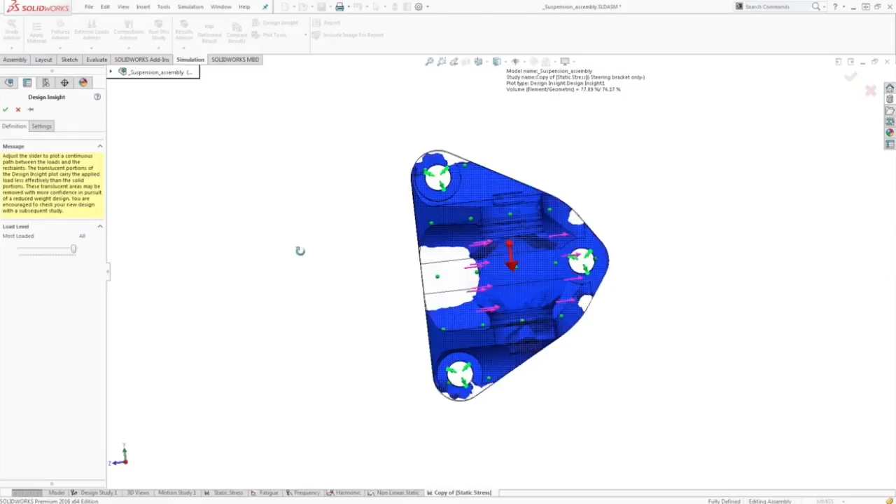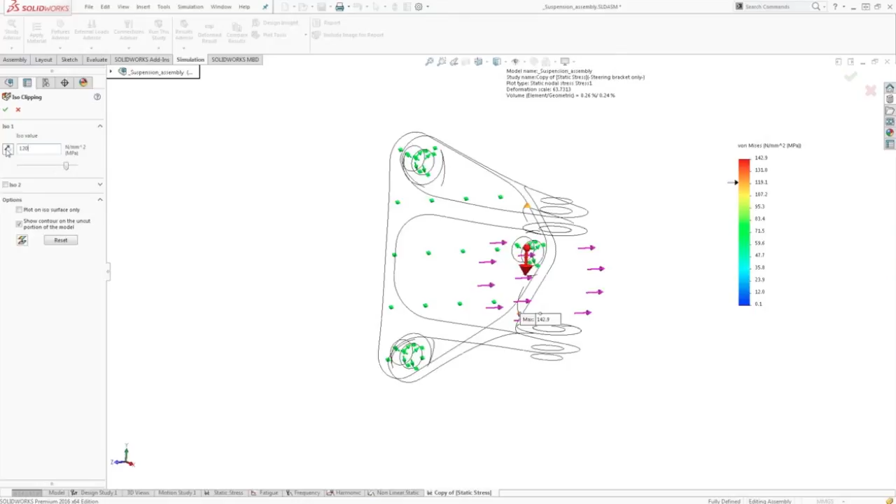So it's very similar to an ISO plot, where when we take a look at our stress, we can go into ISO clipping and we can say, show me everything below, I should say, 120 MPa. So in an ISO plot, you're actually specifying, specific to a plot, what your areas of interest are, and you can say, show me everything below a certain stress value or certain design constraint.

You eventually see the areas in which, I kind of have it opposite here, but it works very similar in the way of, well, where are the areas where it's not going to see most of the stress? We can then utilize this plot to cut out some of these regions. But more specifically, a Design Insight Plot does a very similar functionality, where, again, it shows you the areas where it won't necessarily see too much of the load.

When we apply all of the load, we see we're left with certain regions in which we can cut out and save a little bit on material. So a very powerful plot type that's available to you after you run an analysis.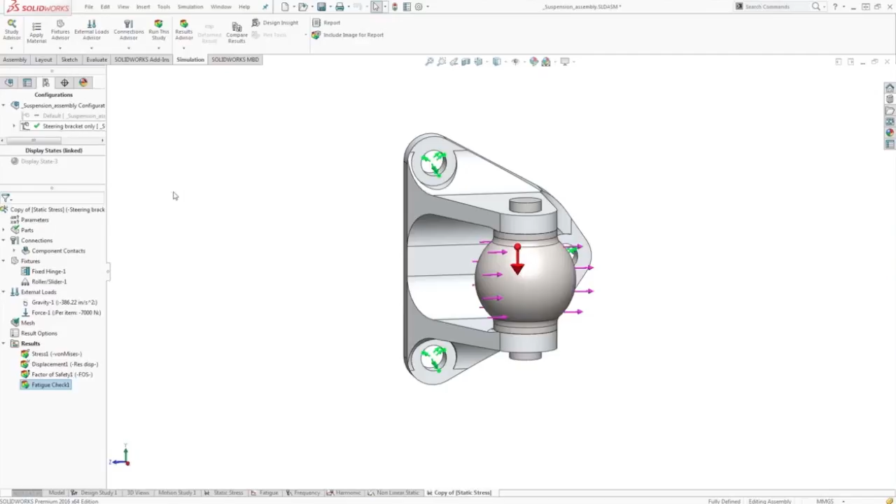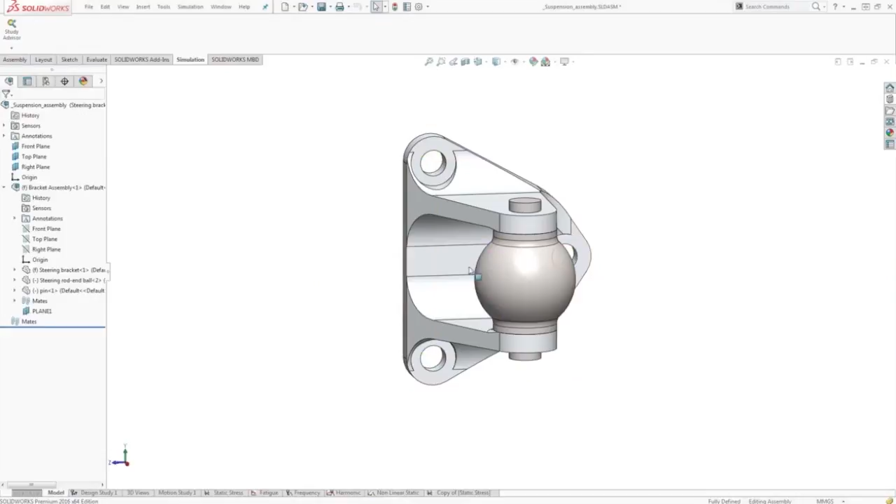The other thing we have available here is selection sets. This is a nice feature they introduced in 2015, shown more as a design integration, not necessarily in simulation, but not a lot of people are aware you can utilize that within Sim. Selection sets are a way for SOLIDWORKS to save certain selections that you select on your body.

One issue a lot of people come across, and I've come across, is defining contacts in an area where you can't easily select a face. Say I wanted to define a contact between this pin and the face it's actually touching. There are different ways to do that, like defining our contact, selecting this face, then doing select other, right-clicking in that region to get the general idea of where that selection is. But sometimes it's not too clear what you're actually selecting.

So one way to accommodate this is creating an actual exploded view. I can create an exploded view, define my contacts here, and select this face and then this face. That's one way to do it.

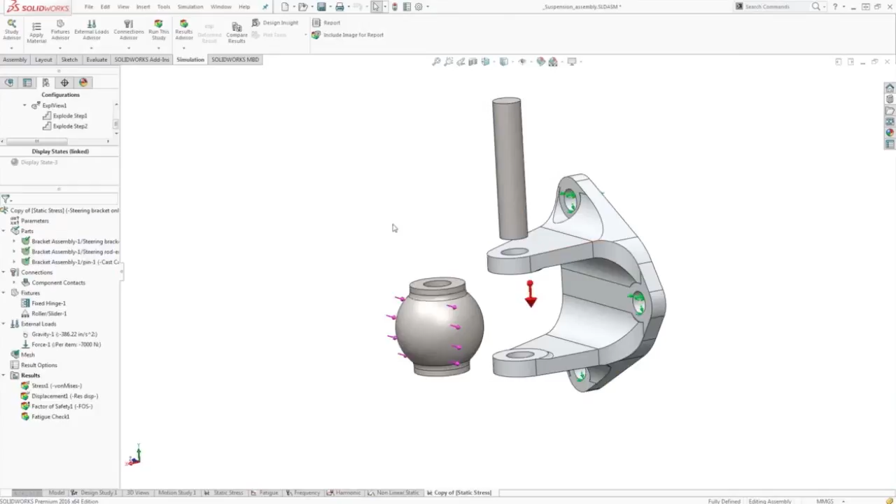But the other thing we have available is, what if we pre-select all the faces I'm potentially going to be selecting a lot? Let me go back to the model so we see this clearer. What if I select this face? I can right-click on that face and say Save Selection. I can select this face as well and do the same thing.

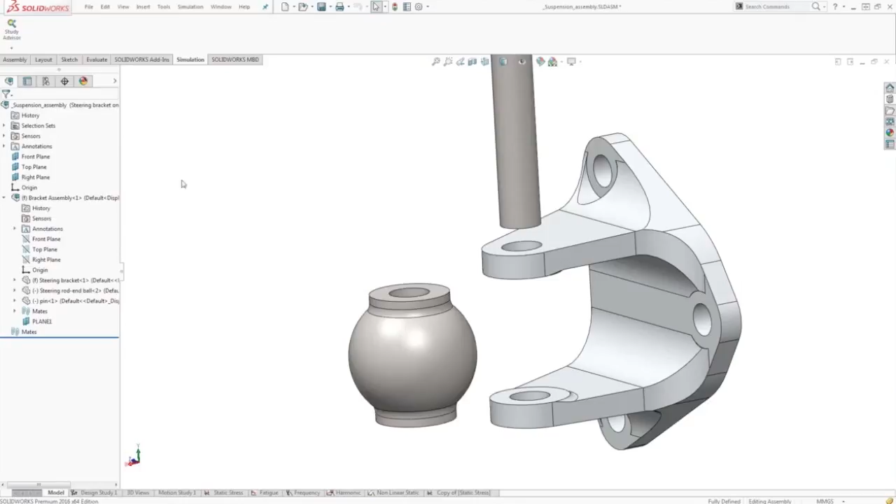You may be asking, where are those saved selections being stored? In this case, I can multi-select these two faces, right-click and say Save Selection. As far as where they're being stored in my feature tree, you see we have 3 unique selections here.

Let me select this face here. Let me do them individually, actually. So you see that we have that selected face, or it should just be selecting that individual face.

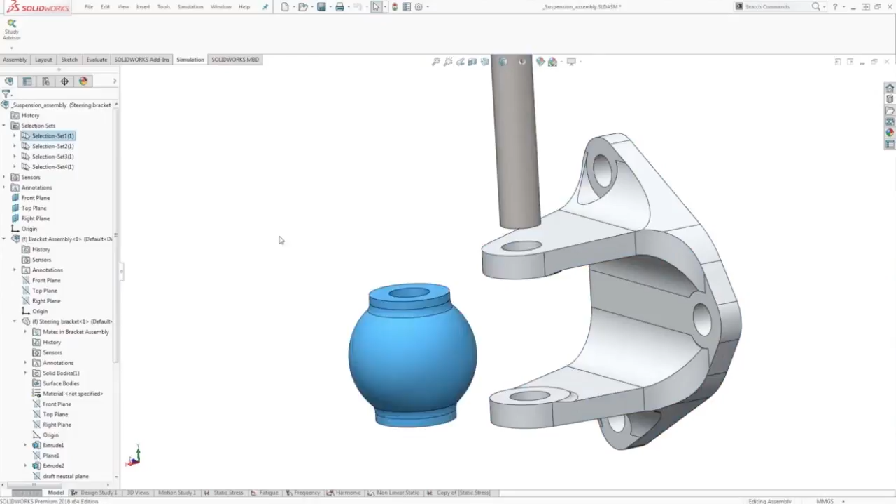Now within that study, when I go into my contacts, right-click, contact set, I can split my menu here and go into my selection sets, and easily select certain selections here. Not really working for me here. Let's try fixed geometry. All right, you guys are going to have to take my word for it. Unfortunately, it's not grabbing the selection.

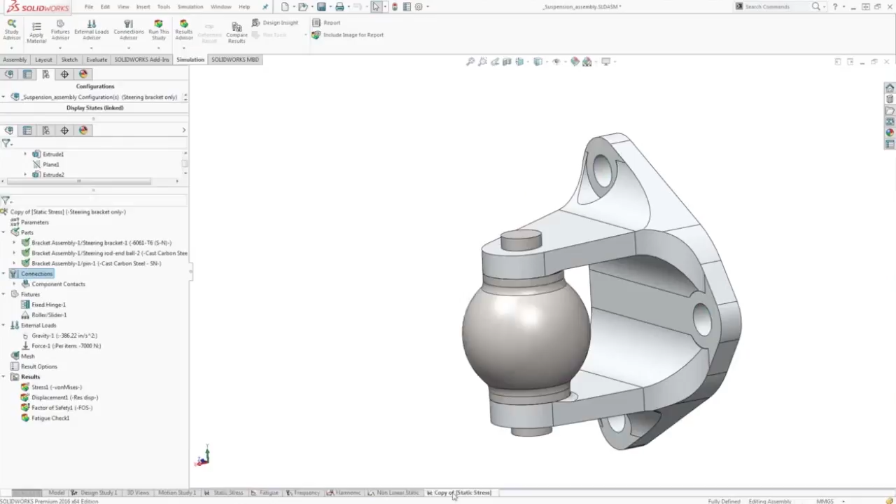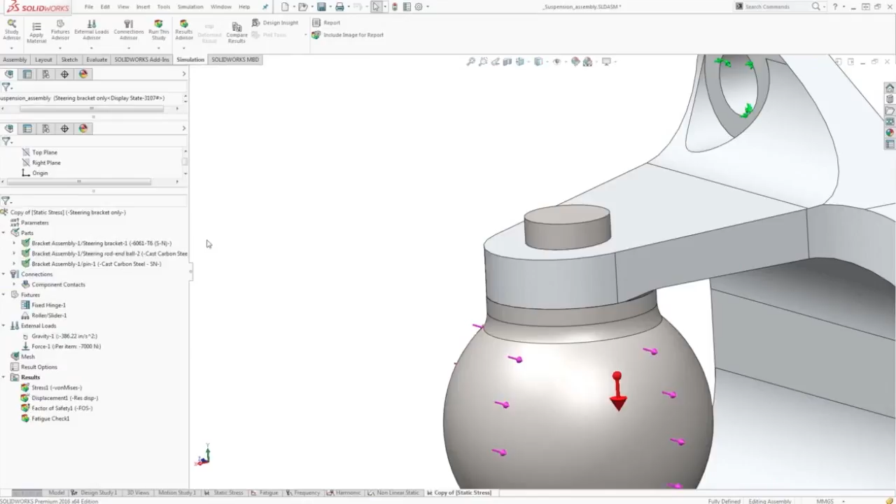What I should be able to see is when I go into a load or a contact, instead of the issue of going to an actual contact set and not easily being able to select those faces, I can utilize those selection sets and have it predefined or select for me that saved selection. Unfortunately it didn't work out for me, but I promise it should work, I've tested it before, it's just not cooperating here. But it's a more efficient way to define those contacts and load conditions, since you've already saved out those face selections.

Let me show you the last thing here, which is the trend tracker, a nice way to define a baseline study and then compare certain results based on any changes you've added to the model or overall sim setup.

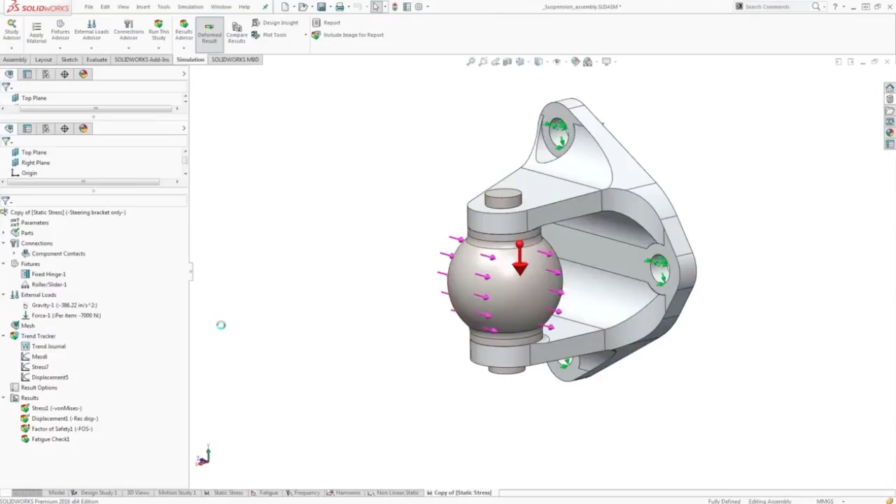I ran this analysis here, and you see we have our stress and displacements already defined. I can then set all these parameters, or these results, as my baseline. When I right-click and say create trend tracker, you see we don't have anything really defined. I can right-click on that trend tracker, and since I already ran the study, I can set this as a baseline. It tells me what the overall mass is.

When we view that here, sorry, let me move my menu. We have one point within that baseline. If I view my stress here, we have some point within there, so it's just logging what that stress value is at that first iteration.

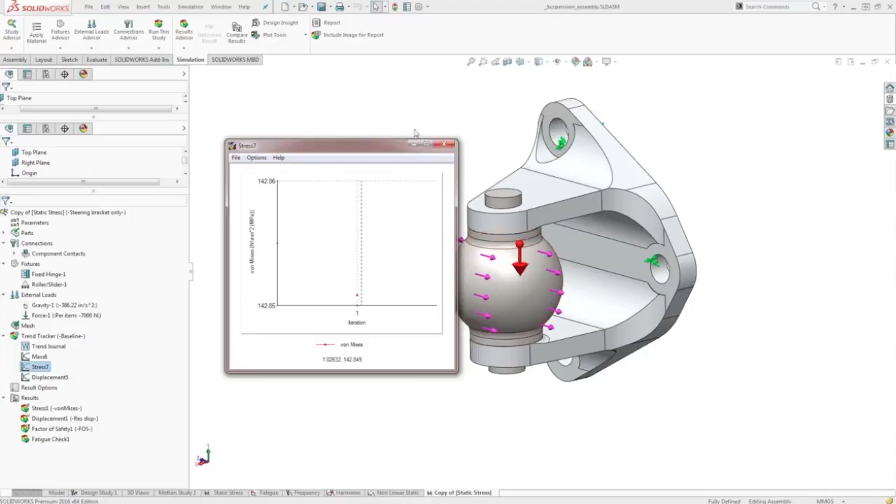So what if I then change this value, not 7,000, but let's cut this in half, a simple divide by 2, hit OK, and then rerun that.

You see that it changed the Trend Tracker from my baseline to iteration 2. Well, what if I apply or suppress gravity onto that and see how that plays a role? I can do that as well. So I'm changing certain parameters of my setup. I can even link this to a geometry change as well.

If I then actually made that cutout within that bracket, what are those stress values or these plot types going to do when I make that change? So now what I can do is I can view what the overall stress was, and when I view that plot...

When I view that plot, you see that for that baseline, we had a max stress of a little over 140. When I divided that load in half, it dropped it all the way down to a little bit above 70, and gravity didn't really play a role either. So you can change all these parameters here.

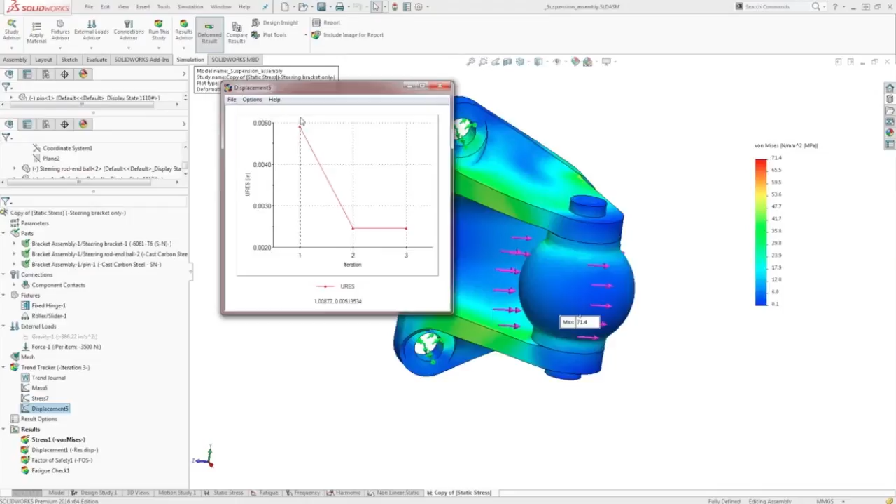You can view the same thing for displacement, where you can look at the trend of what's happening when you make those sim setup adjustments, right? And the beauty of this is, well, what if you're like, okay, that first iteration showed me the best stress, or showed me the max allowable stress that I'm comfortable with? Well, let's revert back to that option here.

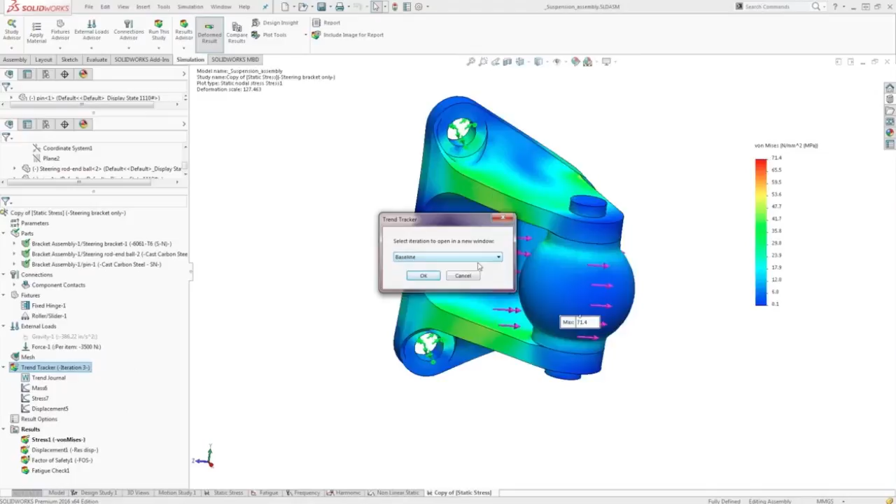So I can right-click on Trend Tracker, and I can view the gallery, or I can right-click and restore a model to an actual iteration, and I can specify it to a specific baseline or any iteration that I applied. So if I want to revert everything back to the baseline, I can hit OK on that. We just accept that, and eventually it'll bring everything back to the original settings, where in this case it brought that load value back to 7,000 as opposed to what I had changed it to.

So in this case, it makes it a lot easier to see what those changes are and then kind of revert back to those actual points there.

So we have a couple questions here. Can we change the location of the stress probe for that tracker? We can, so I'm assuming you're talking about the stress probe in terms of the actual annotation being applied. Not necessarily — the only thing we can change are the parameters of that overall setup or the actual model itself. So parameters such as the loads, the fixtures, or the connections, things like that, those are the things that we are able to change, and it'll reflect within that Trend Tracker.

I had another question here — I think it was reverted back to the section view. Is there a way, in section plots, to remove the wireframe and the hidden part of the section view?

Actually, I may have to go back and get back to you on that question. I want to say that we can, but I would have to specify and actually look for that location to hide it there. I want to say we can remove the wireframe of that, but don't quote me on that until I test it.

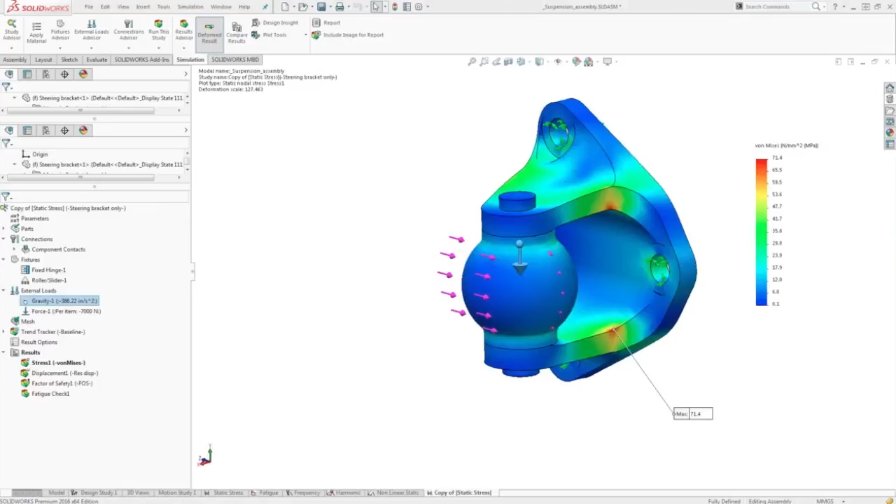Hopefully, going back to the original case here of the Trend Tracker, hopefully you see the benefits of that. Again, we just right-click on our study, add the Trend Tracker, set our baseline, and then change our parameters, and it ultimately saves those components.